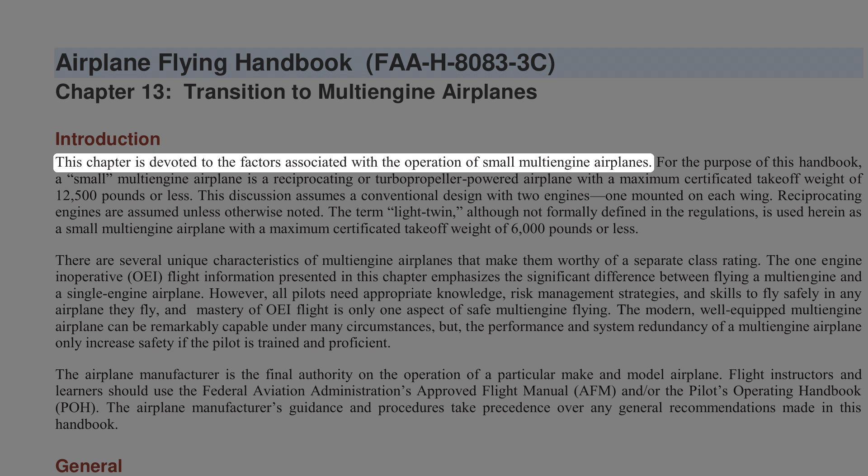Introduction. This chapter is devoted to the factors associated with the operation of small multi-engine airplanes. For the purpose of this handbook, a small multi-engine airplane is a reciprocating or turbopropeller-powered airplane with a maximum certificated takeoff weight of 12,500 pounds or less. This discussion assumes a conventional design with two engines, one mounted on each wing. Reciprocating engines are assumed unless otherwise noted. The term light twin, although not formally defined in the regulations, is used herein as a small multi-engine airplane with a maximum certificated takeoff weight of 6,000 pounds or less.

There are several unique characteristics of multi-engine airplanes that make them worthy of a separate class rating. The one-engine inoperative (OEI) flight information presented in this chapter emphasizes the significant difference between flying a multi-engine and a single-engine airplane. However, all pilots need appropriate knowledge, risk management strategies, and skills to fly safely in any airplane they fly, and mastery of OEI flight is only one aspect of safe multi-engine flying. The modern, well-equipped multi-engine airplane can be remarkably capable under many circumstances, but the performance and system redundancy of a multi-engine airplane only increase safety if the pilot is trained and proficient.

The airplane manufacturer is the final authority on the operation of a particular make and model airplane. Flight instructors and learners should use the Federal Aviation Administration's Approved Flight Manual (AFM) and/or the Pilot's Operating Handbook (POH). The airplane manufacturer's guidance and procedures take precedence over any general recommendations made in this handbook.

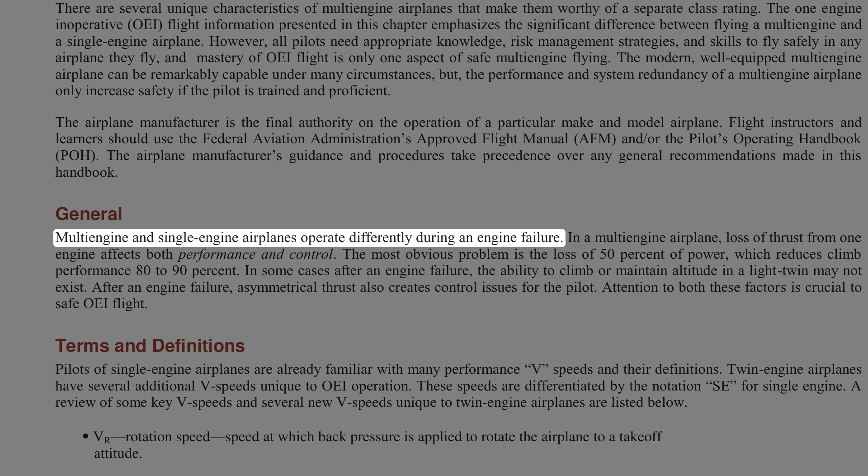General: multi-engine and single-engine airplanes operate differently during an engine failure. In a multi-engine airplane, loss of thrust from one engine affects both performance and control. The most obvious problem is the loss of 50% of power, which reduces climb performance 80 to 90%. In some cases after an engine failure, the ability to climb or maintain altitude in a light twin may not exist. After an engine failure, asymmetrical thrust also creates control issues for the pilot. Attention to both these factors is crucial to safe OEI flight.

Terms and definitions. Pilots of single-engine airplanes are already familiar with many performance V-speeds and their definitions. Twin-engine airplanes have several additional V-speeds unique to OEI operation. These speeds are differentiated by the notation SE, for single-engine. A review of some key V-speeds and several new V-speeds unique to twin-engine airplanes are listed below.

VR, rotation speed: speed at which back pressure is applied to rotate the airplane to a takeoff attitude. VLOF, liftoff speed: speed at which the airplane leaves the surface. Note: some manufacturers reference takeoff performance data to VR, others to VLOF.

VX, best angle of climb speed: speed at which the airplane gains the greatest altitude for a given distance of forward travel. VXSE, best angle of climb speed with OEI. VY, best rate of climb speed: speed at which the airplane gains the most altitude for a given unit of time. VYSE, best rate of climb speed with OEI.

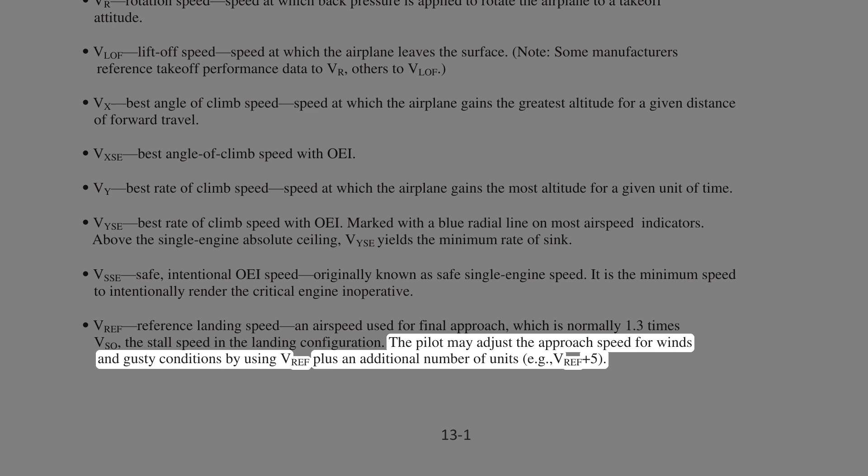VREF, reference landing speed: an airspeed used for final approach, which is normally 1.3 times VSO, the stall speed in the landing configuration. The pilot may adjust the approach speed for winds and gusty conditions by using VREF plus an additional number of units, e.g., VREF plus 5.

VMC, currently defined in 14 CFR Part 23, Section 23.2135(c), as the calibrated airspeed at which, following the sudden critical loss of thrust, it is possible to maintain control of the airplane. VMC is typically marked with a red radial line on most airspeed indicators.

VMC was previously defined in 14 CFR Part 23, Section 23.149 as the calibrated airspeed at which, when the critical engine is suddenly made inoperative, it is possible to maintain control of the airplane with that engine still inoperative, and thereafter maintain straight flight at the same speed with an angle of bank of not more than 5 degrees. This definition still applies to airplanes certified under that regulation. There is no requirement under either determination that the airplane be capable of climbing at this airspeed.

VMC only addresses directional control. Further discussion of VMC as determined during airplane certification and demonstrated in pilot training follows later in this chapter.

Unless otherwise noted, when V speeds are given in the AFM/POH, they apply to sea level, standard day conditions at maximum takeoff weight. Performance speeds vary with aircraft weight, configuration, and atmospheric conditions. The speeds may be stated in statute miles per hour (mph) or knots (kt), and may be given as calibrated airspeeds (CAS) or indicated airspeeds (IAS). As a general rule, newer AFM/POHs show V speeds in knots indicated airspeed (KIAS). Some V speeds are also stated in knots calibrated airspeed (KCAS) to meet certain regulatory requirements. Whenever available, pilots should operate the airplane from published indicated airspeeds.

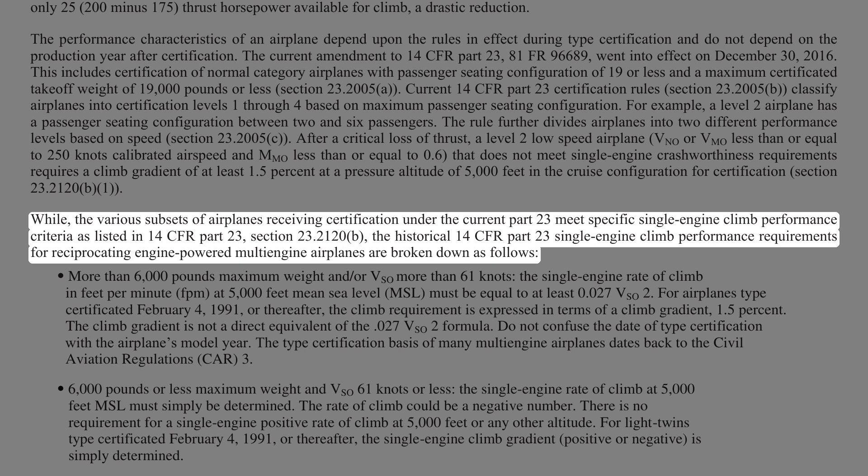While various subsets of airplanes receiving certification under current Part 23 meet specific single-engine climb performance criteria as listed in 14 CFR Part 23, Section 23.2120(B), the historical 14 CFR Part 23 single-engine climb performance requirements for reciprocating engine-powered multi-engine airplanes are broken down as follows.

More than 6,000 pounds maximum weight and/or VSO more than 61 knots: the single-engine rate of climb in feet per minute (FPM) at 5,000 feet MSL must be equal to at least 0.027 times VSO squared.

For airplanes type certificated February 4, 1991, or thereafter, the climb requirement is expressed in terms of climb gradient, 1.5%. The climb gradient is not a direct equivalent of the 0.027 VSO squared formula. Do not confuse the date of type certification with the airplane's model year. The type certification basis of many multi-engine airplanes dates back to Civil Aviation Regulations (CAR) 3.

6,000 pounds or less maximum weight and VSO 61 knots or less: the single-engine rate of climb at 5,000 feet MSL must simply be determined. The rate of climb could be a negative number. There is no requirement for a single-engine positive rate of climb at 5,000 feet or any other altitude. For light twins type certificated February 4, 1991, or thereafter, the single-engine climb gradient, positive or negative, is simply determined.

Operation of systems. This section deals with systems and equipment that are generally installed in multi-engine airplanes. Multi-engine airplanes share many features with complex single-engine airplanes. However, there are certain features that are found more often in airplanes with two or more engines.

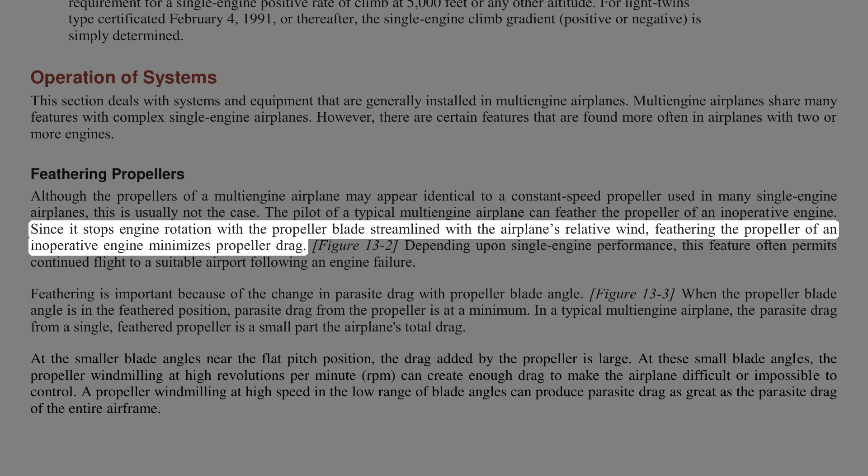Feathering propellers. Although the propellers of a multi-engine airplane may appear identical to a constant-speed propeller used in many single-engine airplanes, this is usually not the case. The pilot of a typical multi-engine airplane can feather the propeller of an inoperative engine. Since it stops engine rotation with the propeller blade streamlined with the airplane's relative wind, feathering the propeller of an inoperative engine minimizes propeller drag. Depending upon single-engine performance, this feature often permits continued flight to a suitable airport following an engine failure.

Feathering is important because of the change in parasite drag with propeller blade angle. When the propeller blade angle is in the feathered position, parasite drag from the propeller is at a minimum. In a typical multi-engine airplane, the parasite drag from a single, feathered propeller is a small part of the airplane's total drag.

At the smaller blade angles near the flat pitch position, the drag added by the propeller is large. At these small blade angles, the propeller windmilling at high RPM can create enough drag to make the airplane difficult or impossible to control. A propeller windmilling at high speed in the low range of blade angles can produce parasite drag as great as the parasite drag of the entire airframe.

Figure 13-2, feathered propeller. As a review, the constant speed propellers on almost all single-engine airplanes are of the non-feathering, oil pressure to increase pitch design. In this design, increased oil pressure from the propeller governor drives the blade angle towards high pitch, low RPM.

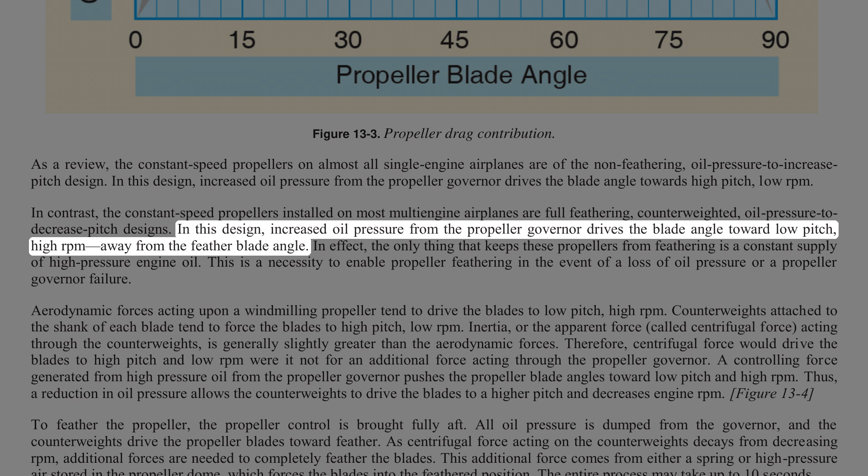In contrast, the constant speed propellers installed on most multi-engine airplanes are full feathering, counterweighted, oil pressure to decrease pitch designs. In this design, increased oil pressure from the propeller governor drives the blade angle toward low pitch, high RPM, away from the feather blade angle.

In effect, the only thing that keeps these propellers from feathering is a constant supply of high-pressure engine oil. This is a necessity to enable propeller feathering in the event of a loss of oil pressure or a propeller governor failure. Aerodynamic forces acting upon a windmilling propeller tend to drive the blades to low pitch, high RPM.

Counterweights attached to the shank of each blade tend to force the blades to high pitch, low RPM. Inertia, or the apparent force called centrifugal force, acting through the counterweights, is generally slightly greater than the aerodynamic forces. Therefore, centrifugal force would drive the blades to high pitch and low RPM were it not for an additional force acting through the propeller governor.

A controlling force generated from high-pressure oil from the propeller governor pushes the propeller blade angles toward low pitch and high RPM. Thus, a reduction in oil pressure allows the counterweights to drive the blades to a higher pitch and decreases engine RPM. To feather the propeller, the control is brought fully aft. All oil pressure is dumped from the governor, and the counterweights drive the propeller blades toward feather.

As centrifugal force acting on the counterweights decays from decreasing RPM, additional forces are needed to completely feather the blades. This additional force comes from either a spring or high-pressure air stored in the propeller dome, which forces the blades into the feathered position. The entire process may take up to 10 seconds.

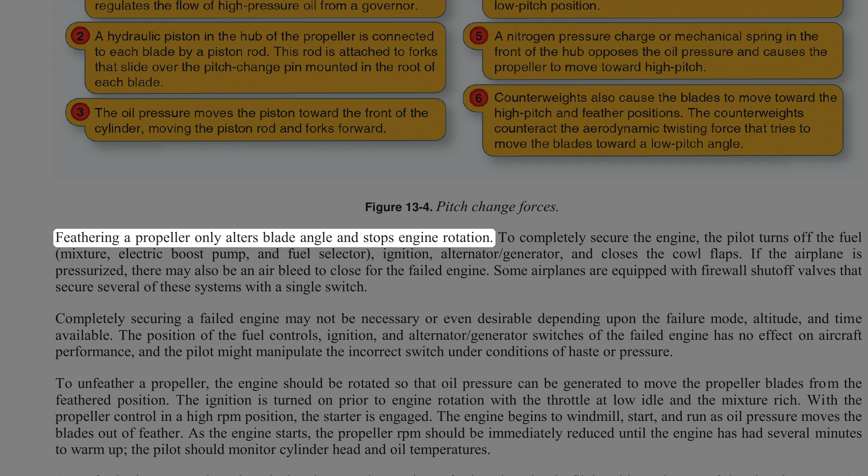Feathering a propeller only alters blade angle and stops engine rotation. To completely secure the engine, the pilot turns off the fuel, mixture, electric boost pump, and fuel selector, ignition, alternator, generator, and closes the cowl flaps.

If the airplane is pressurized, there may also be an air bleed to close for the failed engine. Some airplanes are equipped with firewall shutoff valves that secure several of these systems with a single switch.

Completely securing a failed engine may not be necessary or even desirable depending upon the failure mode, altitude, and time available. The position of the fuel controls, ignition, and alternator, generator switches of the failed engine has no effect on aircraft performance, and the pilot might manipulate the incorrect switch under conditions of haste or pressure.

To unfeather a propeller, the engine should be rotated so that oil pressure can be generated to move the propeller blades from the feathered position. The ignition is turned on prior to engine rotation with the throttle at low idle and the mixture rich. With the propeller control in a high RPM position, the starter is engaged.

The engine begins to windmill, start, and run as oil pressure moves the blades out of feather. As the engine starts, the propeller RPM should be immediately reduced until the engine has had several minutes to warm up. The pilot should monitor cylinder head and oil temperatures.

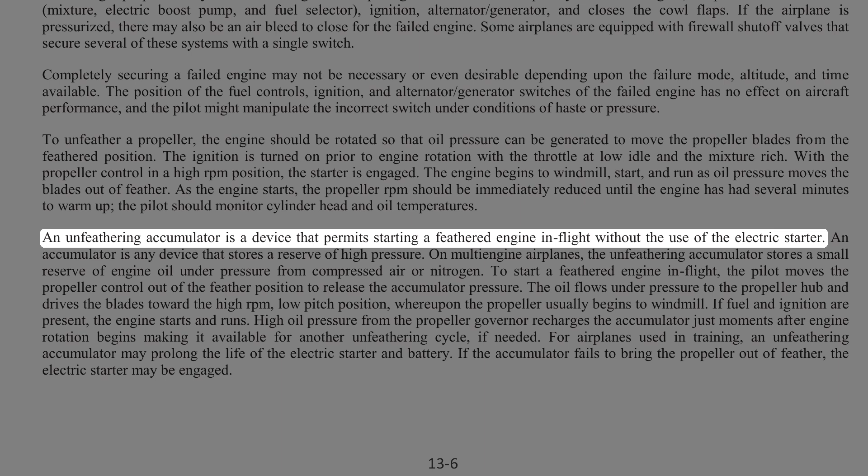An unfeathering accumulator is a device that permits starting a feathered engine in flight without the use of the electric starter. An accumulator is any device that stores a reserve of high pressure. On multi-engine airplanes, the unfeathering accumulator stores a small reserve of engine oil under pressure from compressed air or nitrogen.

To start a feathered engine in flight, the pilot moves the propeller control out of the feather position to release the accumulator pressure. The oil flows under pressure to the propeller hub and drives the blades toward the high RPM, low pitch position, whereupon the propeller usually begins to windmill. If fuel and ignition are present, the engine starts and runs.

High oil pressure from the propeller governor recharges the accumulator just moments after engine rotation begins, making it available for another unfeathering cycle, if needed. For airplanes used in training, an unfeathering accumulator may prolong the life of the electric starter and battery.

If the accumulator fails to bring the propeller out of feather, the electric starter may be engaged. In any event, the AFM/POH procedures should be followed for the exact unfeathering procedure. Both feathering and starting a feathered reciprocating engine on the ground are strongly discouraged by manufacturers due to the excessive stress and vibrations generated.

As just described, a loss of oil pressure from the propeller governor allows the counterweights, spring, and/or dome charge to drive the blades to feather. Logically then, the propeller blades should feather every time an engine is shut down as oil pressure falls to zero.

However, below approximately 800 revolutions per minute, a reduction in centrifugal force allows small anti-feathering lock pins in the pitch-changing mechanism of the propeller hub to move into place and block feathering. Therefore, if a propeller is to be feathered, it needs to be done before engine RPM decays below approximately 800.

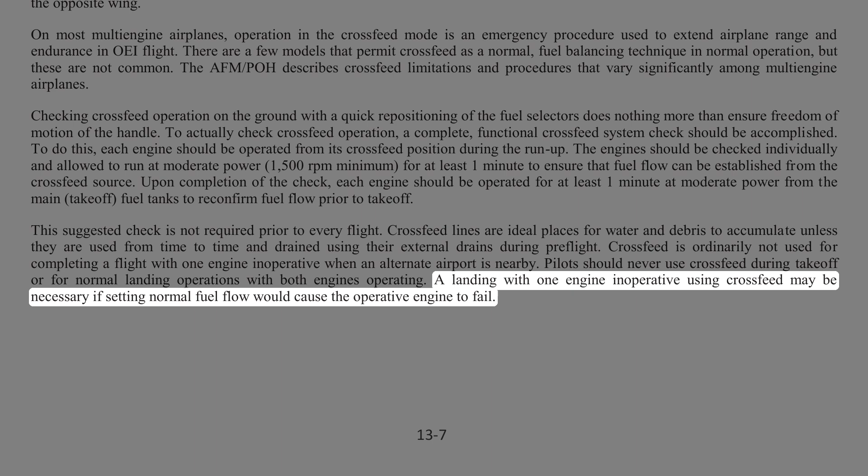Combustion heater. Combustion heaters are another common item on multi-engine airplanes not found on single-engine airplanes.

A combustion heater is best described as a small furnace that burns gasoline to produce heated air for occupant comfort and windshield defogging. Most are thermostatically operated and have a separate hour meter to record time in service for maintenance purposes. Automatic over-temperature protection is provided by a thermal switch mounted on the unit that cannot be accessed in flight. This requires the pilot or mechanic to visually inspect the unit for possible heat damage in order to reset the switch.

Manufacturers often suggest a cool-down period when shutting down a combustion heater. Most heater instructions recommend that outside air be permitted to circulate through the unit for at least 15 seconds in flight, or that the ventilation fan can be operated for at least 2 minutes on the ground. Failure to provide an adequate cool-down usually trips the thermal switch and renders the heater inoperative until the switch is reset.

Flight Director, Autopilot. Multi-engine airplanes are often equipped with Flight Director, Autopilot, FD/AP systems. The system integrates pitch, roll, heading, altitude, and radio navigation signals in a computer. The outputs, called computed commands, are displayed on a Flight Command Indicator, FCI. The FCI replaces the conventional attitude indicator on the instrument panel. The FCI is occasionally referred to as a Flight Director Indicator, FDI, or as an Attitude Director Indicator, ADI.

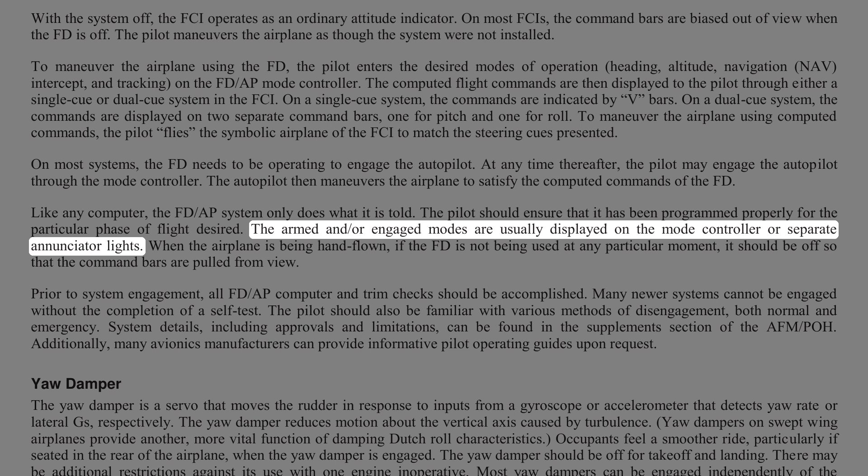The armed and/or engaged modes are usually displayed on the mode controller or separate annunciator lights. When the airplane is being hand-flown, if the FD is not being used at any particular moment, it should be off so that the command bars are pulled from view.

Prior to system engagement, all FD/AP computer and trim checks should be accomplished. Many newer systems cannot be engaged without the completion of a self-test. The pilot should also be familiar with various methods of disengagement, both normal and emergency. System details, including approvals and limitations, can be found in the supplements section of the AFM/POH. Additionally, many avionics manufacturers can provide informative pilot operating guides upon request.

Yaw Damper. The yaw damper is a servo that moves the rudder in response to inputs from a gyroscope or accelerometer that detects yaw rate or lateral Gs, respectively. The yaw damper reduces motion about the vertical axis caused by turbulence. Yaw dampers on swept-wing airplanes provide another, more vital function of damping Dutch roll characteristics. Occupants feel a smoother ride, particularly if seated in the rear of the airplane, when the yaw damper is engaged.

The yaw damper should be off for takeoff and landing. There may be additional restrictions against its use with one engine inoperative. Most yaw dampers can be engaged independently of the autopilot.

Alternator or generator: On a multi-engine aircraft, each engine has an alternator or generator installed. Alternator or generator paralleling circuitry matches the output of each engine's alternator or generator so that the electrical system load is shared equally between them. In the event of an alternator or generator failure, the inoperative unit can be isolated and the entire electrical system powered from the remaining one. Depending upon the electrical capacity of the alternator or generator, the pilot may need to reduce the electrical load, referred to as load shedding, when operating on a single unit. The AFM/POH contains system description and limitations.

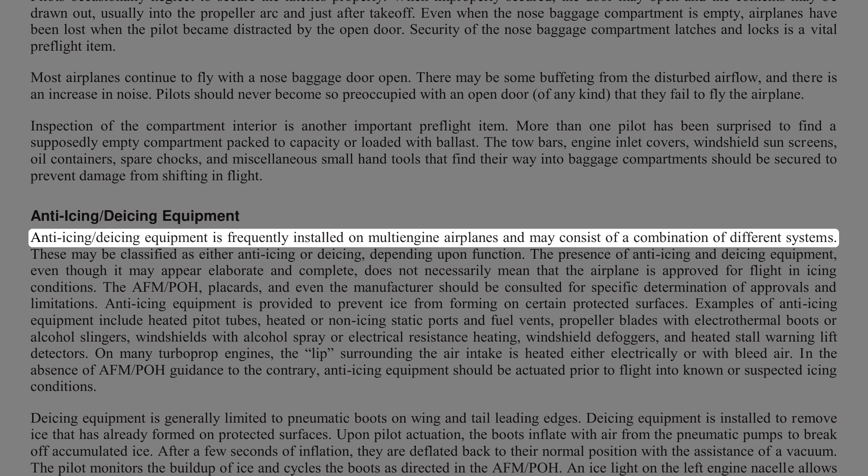Anti-icing, de-icing equipment is frequently installed on multi-engine airplanes and may consist of a combination of different systems. These may be classified as either anti-icing or deicing, depending upon function. The presence of anti-icing and deicing equipment, even though it may appear elaborate and complete, does not necessarily mean that the airplane is approved for flight in icing conditions. The AFM/POH, placards, and even the manufacturer should be consulted for specific determination of approvals and limitations.

Anti-icing equipment is provided to prevent ice from forming on certain protected surfaces. Examples include heated pitot tubes, heated or non-icing static ports and fuel vents, propeller blades with electrothermal boots or alcohol slingers, windshields with alcohol spray or electrical resistance heating, windshield defoggers, and heated stall warning lift detectors. On many turboprop engines, the lip surrounding the air intake is heated either electrically or with bleed air.

In the absence of AFM/POH guidance to the contrary, anti-icing equipment should be actuated prior to flight into known or suspected icing conditions. De-icing equipment is generally limited to pneumatic boots on wing and tail leading edges. De-icing equipment is installed to remove ice that has already formed on protected surfaces.

Upon pilot actuation, the boots inflate with air from the pneumatic pumps to break off accumulated ice. After a few seconds of inflation, they are deflated back to their normal position with the assistance of a vacuum. The pilot monitors the buildup of ice and cycles the boots as directed in the AFM/POH. An ice light on the left engine nacelle allows the pilot to monitor wing ice accumulation at night.

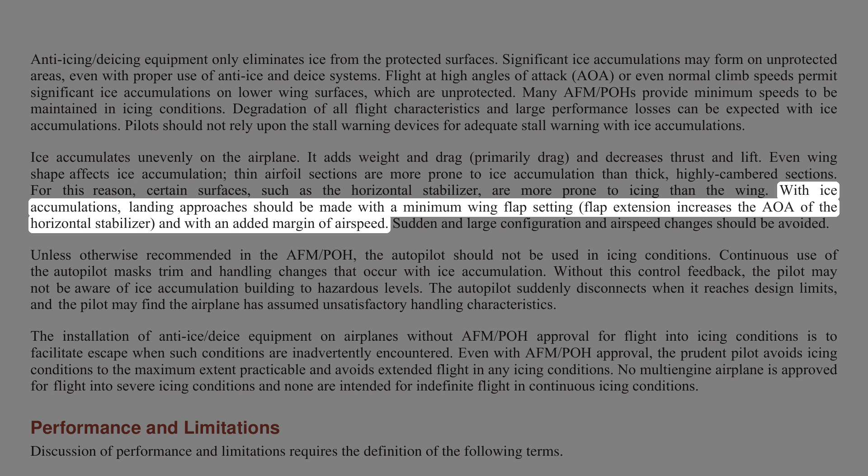For this reason, certain surfaces, such as the horizontal stabilizer, are more prone to icing than the wing. With ice accumulations, landing approaches should be made with a minimum wing flap setting. Flap extension increases the angle of attack of the horizontal stabilizer, so use an added margin of airspeed. Sudden and large configuration and airspeed changes should be avoided.

Unless otherwise recommended in the AFM POH, the autopilot should not be used in icing conditions. Continuous use of the autopilot masks trim and handling changes that occur with ice accumulation. Without this control feedback, the pilot may not be aware of ice accumulation building to hazardous levels. The autopilot suddenly disconnects when it reaches design limits, and the pilot may find the airplane has assumed unsatisfactory handling characteristics.

The installation of anti-ice and de-ice equipment on airplanes without AFM POH approval for flight into icing conditions is to facilitate escape when such conditions are inadvertently encountered. Even with AFM POH approval, the prudent pilot avoids icing conditions to the maximum extent practicable and avoids extended flight in any icing conditions. No multi-engine airplane is approved for flight into severe icing conditions, and none are intended for indefinite flight in continuous icing conditions.

Performance and limitations. Discussion of performance and limitations requires the definition of the following terms. Accelerate stop distance is the runway length required to accelerate to a specified speed, either VR or VLOF as specified by the manufacturer, experience an engine failure, and bring the airplane to a complete stop. Accelerate go distance is the horizontal distance required to continue the takeoff and climb to 50 feet, assuming an engine failure at VR or VLOF as specified by the manufacturer.

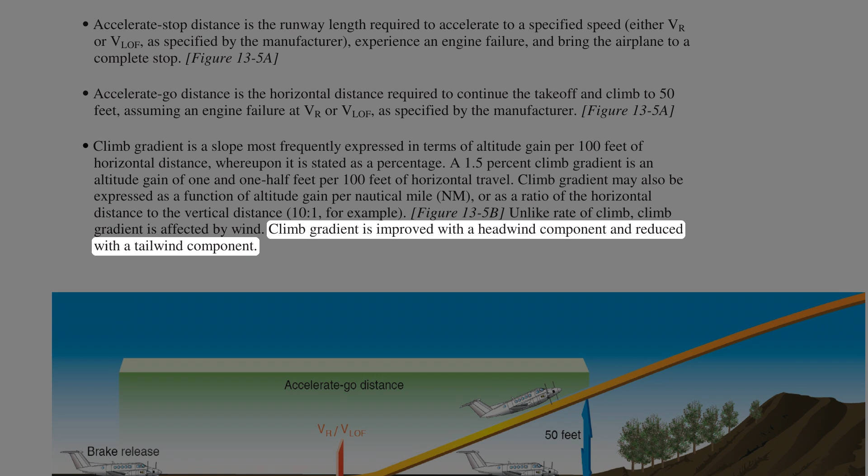Unlike rate of climb, climb gradient is affected by wind. Climb gradient is improved with a headwind component and reduced with a tailwind component.

The all-engine service ceiling of multi-engine airplanes is the highest altitude at which the airplane can maintain a steady rate of climb of 100 fpm with both engines operating. The airplane has reached its absolute ceiling when climb is no longer possible. The single-engine service ceiling is reached when the multi-engine airplane can no longer maintain a 50 fpm rate of climb with one engine inoperative, and its single-engine absolute ceiling when climb is no longer possible.

The takeoff in a multi-engine airplane should be planned in sufficient detail so that the appropriate action is taken in the event of an engine failure. The pilot should be thoroughly familiar with the airplane's performance capabilities and limitations in order to make an informed takeoff decision as part of the pre-flight planning. That decision should be reviewed as the last item of the before takeoff checklist.

In the event of an engine failure shortly after takeoff, the decision is basically one of continuing flight or landing, even off airport. If single-engine climb performance is adequate for continued flight, and the airplane has been promptly and correctly configured, the climb after takeoff may be continued. If single-engine climb performance is such that climb is unlikely or impossible, a landing has to be made in the most suitable area. To be avoided above all is attempting to continue flight when it is not within the airplane's performance capability to do so.

Takeoff planning factors include weight and balance, airplane performance, both single and multi-engine, runway length, slope and contamination, terrain and obstacles in the area, weather conditions, and pilot proficiency.

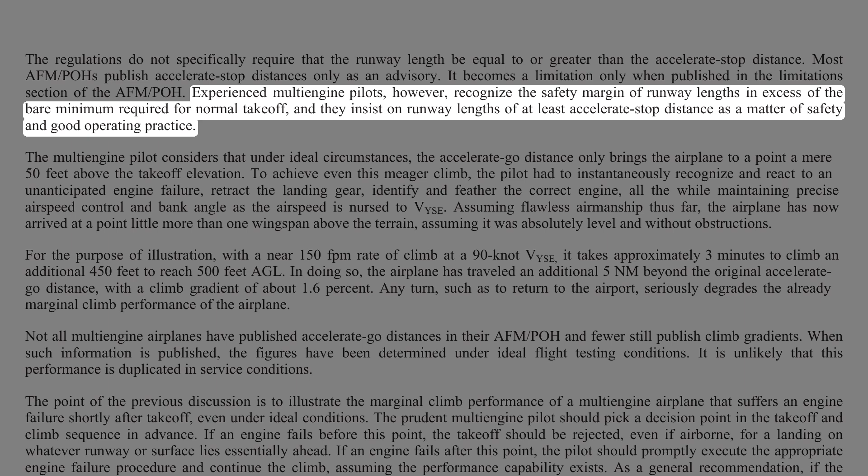The multi-engine pilot considers that under ideal circumstances, the accelerate-go distance only brings the airplane to a point a mere 50 feet above the takeoff elevation. To achieve even this meager climb, the pilot had to instantaneously recognize and react to an unanticipated engine failure, retract the landing gear, identify and feather the correct engine, all while maintaining precise airspeed control and bank angle as the airspeed is nursed to VYSE.

Assuming flawless airmanship thus far, the airplane has now arrived at a point little more than one wingspan above the terrain, assuming it was absolutely level and without obstructions. For illustration, with a near 150 fpm rate of climb at a 90 knot VYSE, it takes approximately 3 minutes to climb an additional 450 feet to reach 500 feet AGL. In doing so, the airplane has traveled an additional 5 nm beyond the original accelerate-go distance, with a climb gradient of about 1.6%. Any turn, such as to return to the airport, seriously degrades the already marginal climb performance of the airplane.

Not all multi-engine airplanes have published accelerate-go distances in their AFM or POH, and fewer still publish climb gradients. When such information is published, the figures have been determined under ideal flight testing conditions. It is unlikely that this performance is duplicated in service conditions. The point of this discussion is to illustrate the marginal climb performance of a multi-engine airplane that suffers an engine failure shortly after takeoff, even under ideal conditions.

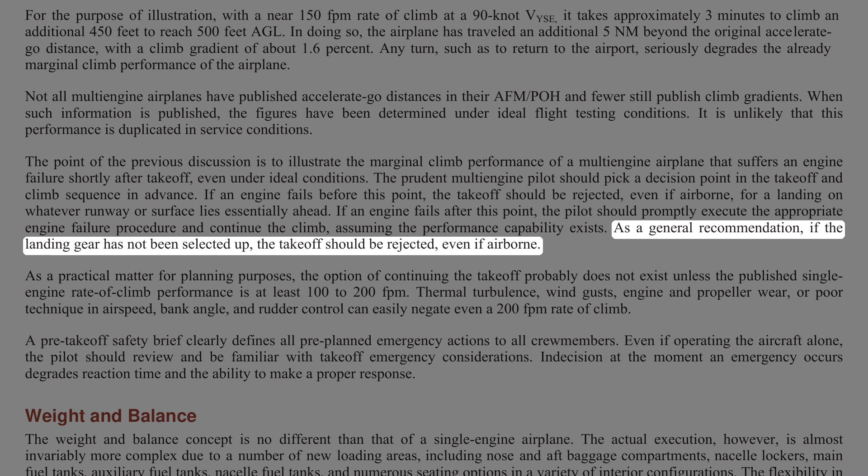As a general recommendation, if the landing gear has not been selected up, the takeoff should be rejected, even if airborne. As a practical matter for planning purposes, the option of continuing the takeoff probably does not exist unless the published single engine rate of climb performance is at least 100 to 200 fpm. Thermal turbulence, wind gusts, engine and propeller wear, or poor technique in airspeed, bank angle, and rudder control can easily negate even a 200 fpm rate of climb.

A pre-takeoff safety brief clearly defines all pre-planned emergency actions to all crew members. Even if operating the aircraft alone, the pilot should review and be familiar with takeoff emergency considerations. Indecision at the moment an emergency occurs degrades reaction time and the ability to make a proper response.

Weight and balance: the concept is no different than that of a single-engine airplane. The actual execution, however, is almost invariably more complex due to a number of new loading areas, including nose and aft baggage compartments, nacelle lockers, main fuel tanks, auxiliary fuel tanks, nacelle fuel tanks, and numerous seating options in a variety of interior configurations. The flexibility in loading offered by the multi-engine airplane places a responsibility on the pilot to address weight and balance prior to each flight.

The terms empty weight, licensed empty weight, standard empty weight, and basic empty weight, as they appear on the manufacturer's original weight and balance documents, are sometimes confused by pilots. In 1975, the General Aviation Manufacturers Association, GAMA, adopted a standardized format for AFM POHs. It was implemented by most manufacturers in model year 1976. Airplanes whose manufacturers conform to the GAMA standards utilize the following terminology for weight and balance.

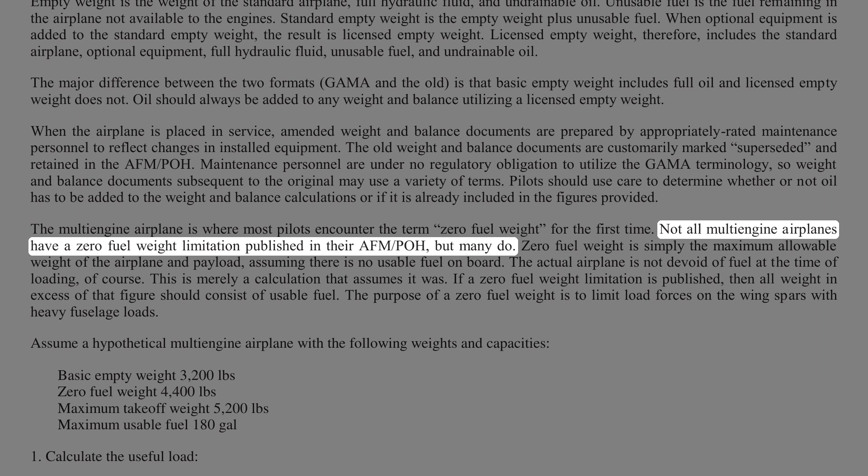The multi-engine airplane is where most pilots encounter the term zero fuel weight for the first time. Not all multi-engine airplanes have a zero fuel weight limitation published in their AFM, POH, but many do. Zero fuel weight is simply the maximum allowable weight of the airplane and payload, assuming there is no usable fuel on board. The actual airplane is not devoid of fuel at the time of loading, of course. This is merely a calculation that assumes it was.

If a zero fuel weight limitation is published, then all weight in excess of that figure should consist of usable fuel. The purpose of a zero fuel weight is to limit load forces on the wing spars with heavy fuselage loads. Assume a hypothetical multi-engine airplane with the following weights and capacities: basic empty weight 3,200 pounds, zero fuel weight 4,400 pounds, maximum takeoff weight 5,200 pounds, maximum usable fuel 180 gallons.

1. Calculate the useful load. Maximum takeoff weight 5,200 pounds, minus basic empty weight 3,200 pounds, equals useful load 2,000 pounds. The useful load is the maximum combination of usable fuel, passengers, baggage, and cargo that the airplane is capable of carrying.

2. Calculate the payload. Zero fuel weight 4,400 pounds, minus basic empty weight 3,200 pounds, equals payload 1,200 pounds. The payload is the maximum combination of passengers, baggage, and cargo that the airplane is capable of carrying. A zero fuel weight, if published, is the limiting weight.

3. Calculate the fuel capacity at maximum payload, 1,200 pounds. Maximum takeoff weight 5,200 pounds, minus zero fuel weight 4,400 pounds, equals fuel allowed 800 pounds. Assuming maximum payload, the only weight permitted in excess of the zero fuel weight should consist of usable fuel. In this case, 133.3 gallons.

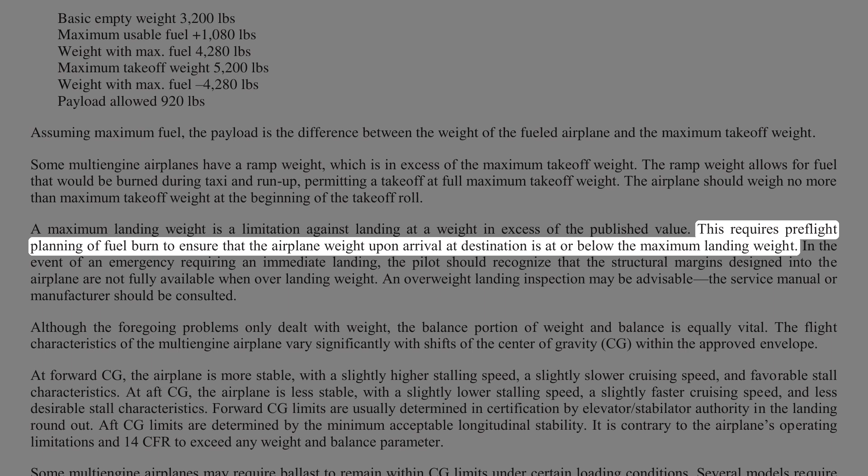A maximum landing weight is a limitation against landing at a weight in excess of the published value. This requires pre-flight planning of fuel burn to ensure that the airplane weight upon arrival at destination is at or below the maximum landing weight. In the event of an emergency requiring an immediate landing, the pilot should recognize that the structural margins designed into the airplane are not fully available when over landing weight.

An overweight landing inspection may be advisable. The service manual or manufacturer should be consulted.

Although the foregoing problems only dealt with weight, the balance portion of weight and balance is equally vital. The flight characteristics of the multi-engine airplane vary significantly with shifts of the center of gravity, CG, within the approved envelope. At forward CG, the airplane is more stable, with a slightly higher stalling speed, a slightly slower cruising speed, and favorable stall characteristics. At aft CG, the airplane is less stable, with a slightly lower stalling speed, a slightly faster cruising speed, and less desirable stall characteristics.

Forward CG limits are usually determined in certification by elevator or stabilator authority in the landing round out. Aft CG limits are determined by the minimum acceptable longitudinal stability. It is contrary to the airplane's operating limitations and 14 CFR to exceed any weight and balance parameter.

Some multi-engine airplanes may require ballast to remain within CG limits under certain loading conditions. Several models require ballast in the aft baggage compartment with only a learner and instructor on board to avoid exceeding the forward CG limit. When passengers are seated in the aftmost seats of some models, ballast or baggage may be required in the nose baggage compartment to avoid exceeding the aft CG limit.

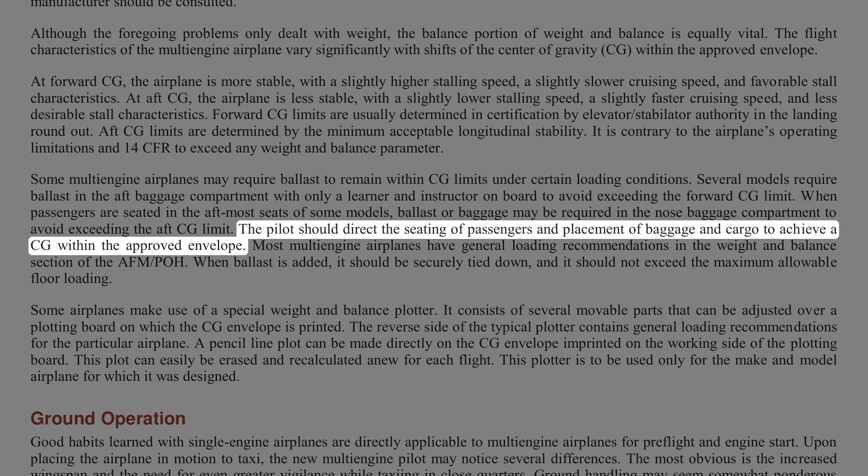The pilot should direct the seating of passengers and placement of baggage and cargo to achieve a CG within the approved envelope. Most multi-engine airplanes have general loading recommendations in the weight and balance section of the AFM/POH. When ballast is added, it should be securely tied down, and should not exceed the maximum allowable floor loading.

Some airplanes make use of a special weight and balance plotter. It consists of several movable parts that can be adjusted over a plotting board on which the CG envelope is printed. The reverse side of the typical plotter contains general loading recommendations for the particular airplane. A pencil line plot can be made directly on the CG envelope imprinted on the working side of the plotting board. This plot can easily be erased and recalculated anew for each flight. This plotter is to be used only for the make and model airplane for which it was designed.

Ground operation: good habits learned with single-engine airplanes are directly applicable to multi-engine airplanes for pre-flight and engine start. Upon placing the airplane in motion to taxi, the new multi-engine pilot may notice several differences. The most obvious is the increased wingspan and the need for even greater vigilance while taxiing in close quarters. Ground handling may seem somewhat ponderous, and the multi-engine airplane is not as nimble as the typical 2- or 4-place single-engine airplane. As always, the pilot should use care not to ride the brakes by keeping engine power to a minimum.

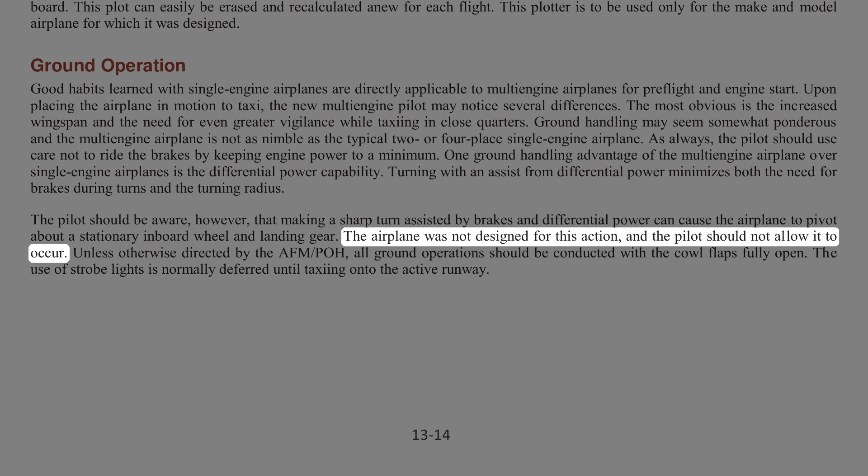One ground handling advantage of the multi-engine airplane over single-engine airplanes is the differential power capability. Turning with an assist from differential power minimizes both the need for brakes during turns and the turning radius. The pilot should be aware, however, that making a sharp turn assisted by brakes and differential power can cause the airplane to pivot about a stationary inboard wheel and landing gear. The airplane was not designed for this action, and the pilot should not allow it to occur.

Unless otherwise directed by the AFM/POH, all ground operations should be conducted with the cowl flaps fully open. The use of strobe lights is normally deferred until taxiing onto the active runway.

Normal and crosswind takeoff and climb. After completing the before takeoff checklist and pre-takeoff safety brief, and after receiving an air traffic control clearance if applicable, the pilot should check for approaching aircraft and line up on the runway centerline. If departing from an airport without an operating control tower, the pilot should listen on the appropriate frequency, make a careful check for traffic, and transmit a radio advisory before entering the runway.

Sharp turns onto the runway combined with a rolling takeoff are not a good operating practice and may be prohibited by the AFM/POH due to the possibility of unporting a fuel tank pickup. The takeoff itself may be prohibited by the AFM/POH under any circumstances below certain fuel levels.

The flight controls should be positioned for a crosswind, if present. Exterior lights, such as landing and taxi lights and wingtip strobes, should be illuminated immediately prior to initiating the takeoff roll, day or night. If holding in takeoff position for any length of time, particularly at night, the pilot should activate all exterior lights upon taxiing into position.

Takeoff power should be set as recommended in the AFM/POH. With normally aspirated, non-turbocharged engines, this is full throttle. Full throttle is also used in most turbocharged engines. There are some turbocharged engines, however, that require the pilot to set a specific power setting, usually just below red line manifold pressure. This yields takeoff power with less than full throttle travel. Turbocharged engines often require special consideration.

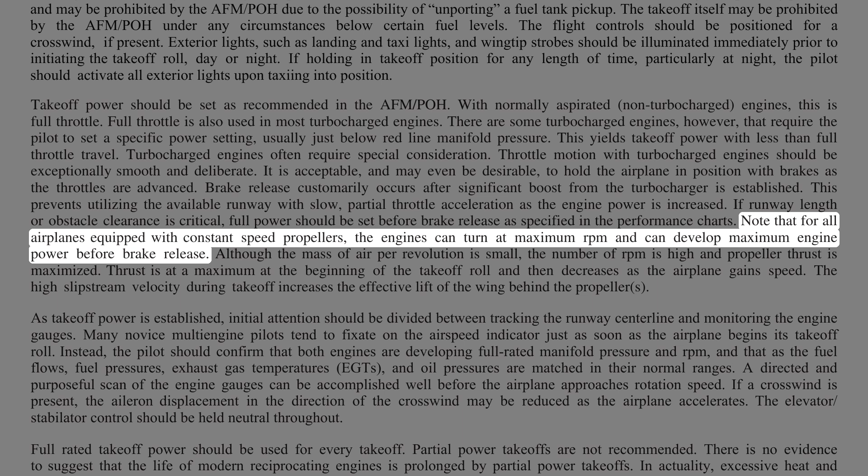If runway length or obstacle clearance is critical, full power should be set before brake release as specified in the performance charts. Note that for all airplanes equipped with constant speed propellers, the engines can turn at maximum RPM and can develop maximum engine power before brake release.

Although the mass of air per revolution is small, the number of RPM is high and propeller thrust is maximized. Thrust is at a maximum at the beginning of the takeoff roll and then decreases as the airplane gains speed. The high slipstream velocity during takeoff increases the effective lift of the wing behind the propellers. As takeoff power is established, initial attention should be divided between tracking the runway centerline and monitoring the engine gauges.

Many novice multi-engine pilots tend to fixate on the airspeed indicator as soon as the airplane begins its takeoff roll. Instead, the pilot should confirm that both engines are developing full rated manifold pressure and RPM, and that fuel flows, fuel pressures, exhaust gas temperatures, and oil pressures are matched in their normal ranges. A directed and purposeful scan of the engine gauges can be accomplished well before the airplane approaches rotation speed.

If a crosswind is present, the aileron displacement in the direction of the crosswind may be reduced as the airplane accelerates. The elevator or stabilator control should be held neutral throughout.

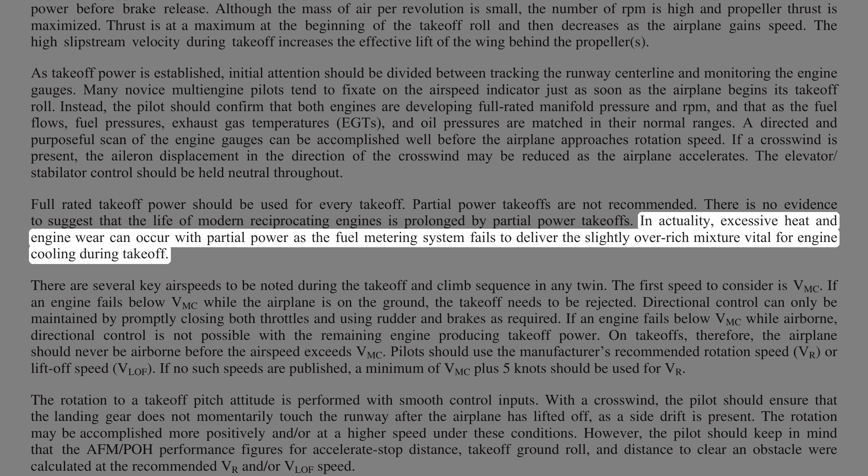Full rated takeoff power should be used for every takeoff. Partial power takeoffs are not recommended. There is no evidence to suggest that the life of modern reciprocating engines is prolonged by partial power takeoffs. In actuality, excessive heat and engine wear can occur with partial power, as the fuel metering system fails to deliver the slightly over-rich mixture vital for engine cooling during takeoff.

There are several key airspeeds to be noted during the takeoff and climb sequence in any twin. The first speed to consider is VMC. If an engine fails below VMC while the airplane is on the ground, the takeoff needs to be rejected. Directional control can only be maintained by promptly closing both throttles and using rudder and brakes as required. If an engine fails below VMC while airborne, directional control is not possible with the remaining engine producing takeoff power. On takeoffs, therefore, the airplane should never be airborne before the airspeed exceeds VMC.

Pilots should use the manufacturer's recommended rotation speed, VR, or liftoff speed, VLOF. If no such speeds are published, a minimum of VMC plus 5 knots should be used for VR. The rotation to a takeoff pitch attitude is performed with smooth control inputs.

With a crosswind, the pilot should ensure that the landing gear does not momentarily touch the runway after the airplane has lifted off, as a side drift is present. The rotation may be accomplished more positively and/or at a higher speed under these conditions. However, the pilot should keep in mind that the AFM/POH performance figures for accelerate-stop distance, takeoff ground roll, and distance to clear an obstacle were calculated at the recommended VR and/or VLOF speed.

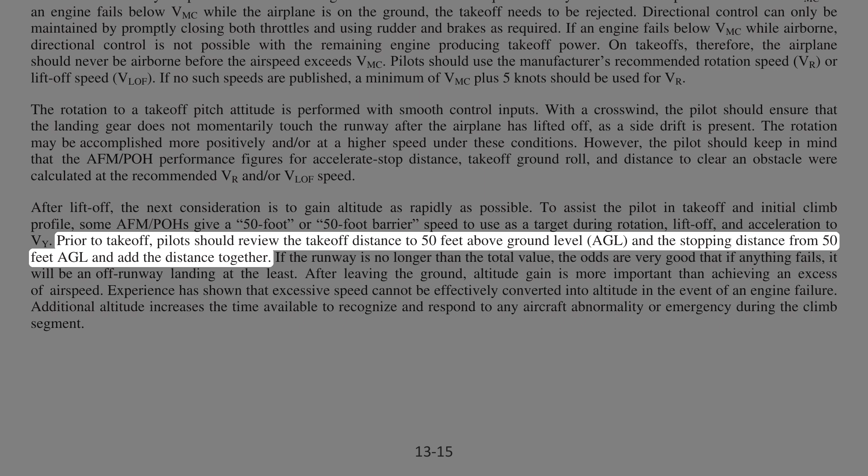After liftoff, the next consideration is to gain altitude as rapidly as possible. To assist the pilot in the takeoff and initial climb profile, some AFM/POHs give a 50-foot barrier speed to use as a target during rotation, liftoff, and acceleration to VY. Prior to takeoff, pilots should review the takeoff distance to 50 feet AGL and the stopping distance from 50 feet AGL, and add the distances together. If the runway is no longer than that total value, the odds are very good that if anything fails, it will be an off-runway landing at the least.

After leaving the ground, altitude gain is more important than achieving an excess of airspeed. Experience has shown that excessive speed cannot be effectively converted into altitude in the event of an engine failure. Additional altitude increases the time available to recognize and respond to any aircraft abnormality or emergency during the climb segment.

Excessive climb attitudes can be just as dangerous as excessive airspeed. Steep climb attitudes limit forward visibility and impede the pilot's ability to detect and avoid other traffic. The airplane should be allowed to accelerate in a shallow climb to attain VY, the best all-engine rate of climb speed. VY should then be maintained until achieving a safe single-engine maneuvering altitude, which considers terrain and obstructions. Any speed above or below VY reduces the performance of the airplane.

Even with all engines operating normally, terrain and obstruction clearance during the initial climb after takeoff is an important pre-flight consideration. Most airliners and most turbine-powered airplanes climb out at an attitude that yields best rate of climb, VY, usually utilizing a flight management system, FMS.

When to raise the landing gear after takeoff depends on several factors. Normally, the gear should be retracted when there is insufficient runway available for landing and after a positive rate of climb is established, as indicated on the altimeter. If an excessive amount of runway is available, it would not be prudent to leave the landing gear down for an extended period of time and sacrifice climb performance and acceleration.

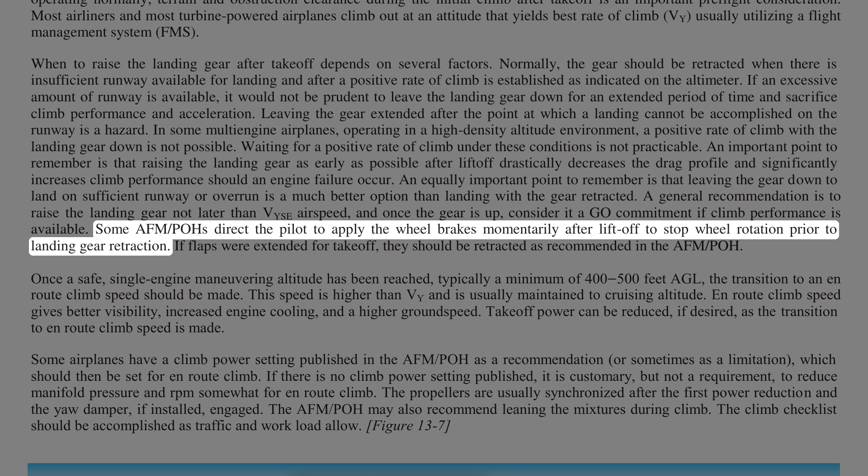A general recommendation is to raise the landing gear not later than VYSE airspeed, and once the gear is up, consider it a go commitment if climb performance is available. Some AFM/POHs direct the pilot to apply the wheel brakes momentarily after liftoff to stop wheel rotation prior to landing gear retraction.

If flaps were extended for takeoff, they should be retracted as recommended in the AFM/POH. Once a safe, single-engine maneuvering altitude has been reached, typically a minimum of 400 to 500 feet AGL, the transition to an en route climb speed should be made. This speed is higher than VY and is usually maintained to cruising altitude.

En route climb speed gives better visibility, increased engine cooling, and a higher ground speed. Takeoff power can be reduced, if desired, as the transition to en route climb speed is made. Some airplanes have a climb power setting published in the AFM/POH as a recommendation, or sometimes as a limitation, which should then be set for en route climb.

If there is no climb power setting published, it is customary, but not a requirement, to reduce manifold pressure and RPM somewhat for en route climb. The propellers are usually synchronized after the first power reduction, and the yaw damper, if installed, engaged. The AFM/POH may also recommend leaning the mixtures during climb. The climb checklist should be accomplished as traffic and workload allow.

Short field takeoff and climb. The short field takeoff and climb differs from the normal takeoff and climb in the airspeeds and initial climb profile. Some AFM/POHs give separate short field takeoff procedures and performance charts that recommend specific flap settings and airspeeds.

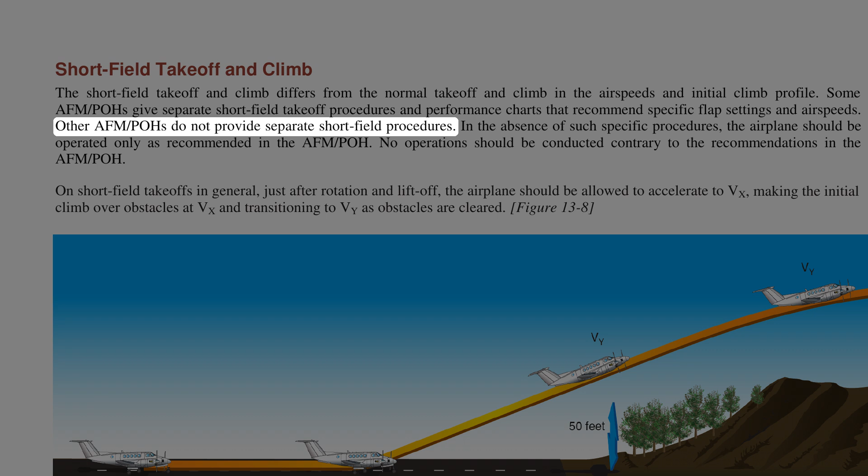Other AFM/POHs do not provide separate short field procedures. In the absence of such specific procedures, the airplane should be operated only as recommended in the AFM/POH. No operations should be conducted contrary to the recommendations in the AFM/POH. On short field takeoffs in general, just after rotation and liftoff, the airplane should be allowed to accelerate to VX, making the initial climb over obstacles at VX and transitioning to VY as obstacles are cleared.

When partial flaps are recommended for short field takeoffs, many light twins have a strong tendency to become airborne prior to VMC plus 5 knots. Attempting to prevent premature liftoff with forward elevator pressure results in wheel barrowing. To prevent this, allow the airplane to become airborne, but only a few inches above the runway.

The pilot should be prepared to promptly abort the takeoff and land in the event of engine failure on takeoff with landing gear and flaps extended at airspeeds below VX. Engine failure on takeoff, particularly with obstructions, is compounded by the low airspeeds and steep climb attitudes utilized in short field takeoffs. VX and VXSE are often perilously close to VMC, leaving scant margin for error in the event of engine failure as VXSE is assumed.

If flaps were used for takeoff, the engine failure situation becomes even more critical due to the additional drag incurred. If VX is less than 5 knots higher than VMC, give strong consideration to reducing useful load or using another runway in order to increase the takeoff margins so that a short field technique is not required.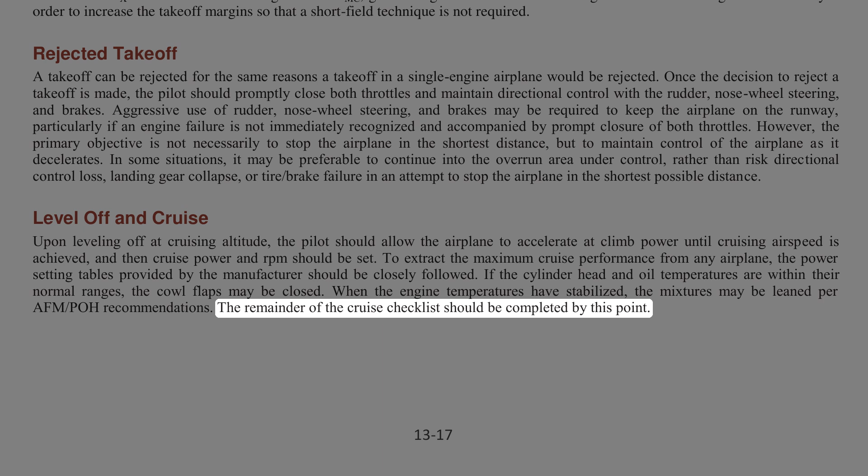Fuel management in multi-engine airplanes is often more complex than in single-engine airplanes. Depending upon system design, the pilot may need to select between main tanks and auxiliary tanks, or even employ fuel transfer from one tank to another. In complex fuel systems, limitations are often found restricting the use of some tanks to level flight only, or requiring a reserve of fuel in the main tanks for descent and landing.

Electric fuel pump operation can also vary widely among different models, particularly during tank switching or fuel transfer. Some fuel pumps are to be on for takeoff and landing, others are to be off. There is simply no substitute for thorough systems and AFM/POH knowledge when operating complex aircraft.

Slow flight. There is nothing unusual about maneuvering during slow flight in a multi-engine airplane. Slow flight may be conducted in straight and level flight, turns, climbs, or descents. It can also be conducted in the clean configuration, landing configuration, or at any other combination of landing gear and flaps. Slow flight in a multi-engine airplane should be conducted so the maneuver can be completed no lower than 3,000 feet AGL, or higher if recommended by the manufacturer.

In all cases, practicing slow flight should be conducted at an adequate height above the ground for recovery should the airplane inadvertently stall. Pilots should closely monitor cylinder head and oil temperatures during slow flight. Some high-performance multi-engine airplanes tend to heat up fairly quickly under some conditions of slow flight, particularly in the landing configuration.

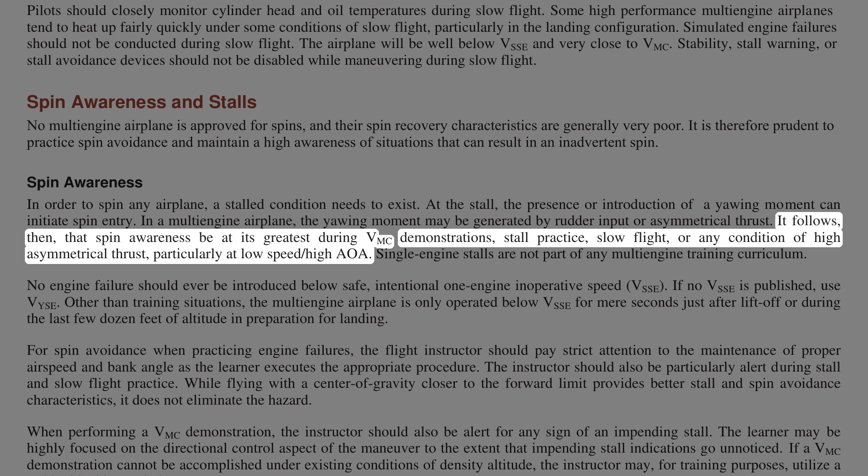At the stall, the presence or introduction of a yawing moment can initiate spin entry. In a multi-engine airplane, the yawing moment may be generated by rudder input or asymmetrical thrust. It follows, then, that spin awareness be at its greatest during VMC demonstrations, stall practice, slow flight, or any condition of high asymmetrical thrust, particularly at low speed, high AOA.

Single-engine stalls are not part of any multi-engine training curriculum. No engine failure should ever be introduced below safe, intentional one-engine inoperative speed, VSSE. If no VSSE is published, use VYSE. Other than training situations, the multi-engine airplane is only operated below VSSE for mere seconds just after liftoff, or during the last few dozen feet of altitude in preparation for landing.

For spin avoidance when practicing engine failures, the flight instructor should pay strict attention to the maintenance of proper airspeed and bank angle as the learner executes the appropriate procedure. The instructor should also be particularly alert during stall and slow flight practice. While flying with a center of gravity closer to the forward limit provides better stall and spin avoidance characteristics, it does not eliminate the hazard.

When performing a VMC demonstration, the instructor should also be alert for any sign of an impending stall. The learner may be highly focused on the directional control aspect of the maneuver to the extent that impending stall indications go unnoticed. If a VMC demonstration cannot be accomplished under existing conditions of density altitude, the instructor may, for training purposes, utilize a rudder blocking technique.

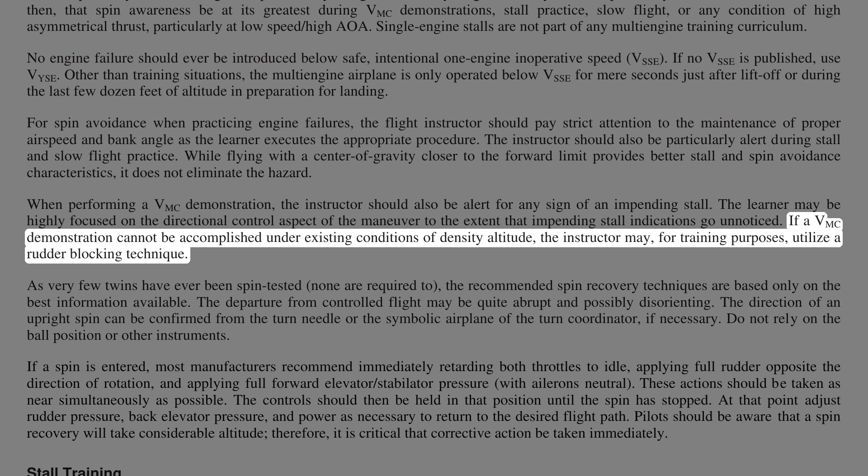As very few twins have ever been spin tested, and none are required to be, the recommended spin recovery techniques are based only on the best information available. The departure from controlled flight may be quite abrupt and possibly disorienting.

The direction of an upright spin can be confirmed from the turn needle or the symbolic airplane of the turn coordinator, if necessary. Do not rely on the ball position or other instruments.

If a spin is entered, most manufacturers recommend immediately retarding both throttles to idle, applying full rudder opposite the direction of rotation, and applying full forward elevator or stabilator pressure, with ailerons neutral. These actions should be taken as near simultaneously as possible.

The control should then be held in that position until the spin has stopped. At that point, adjust rudder pressure, back elevator pressure, and power as necessary to return to the desired flight path. Pilots should be aware that a spin recovery will take considerable altitude; therefore, it is critical that corrective action be taken immediately. Stall training.

It is recommended that stalls be practiced at an altitude that allows recovery no lower than 3,000 feet AGL for multi-engine airplanes, or higher if recommended by the AFM/POH. Losing altitude during recovery from a stall is to be expected.

Stall characteristics vary among multi-engine airplanes just as they do with single-engine airplanes, and therefore a pilot should be familiar with them. Yet the most important stall recovery step in a multi-engine airplane is the same as it is in all airplanes: reduce the angle of attack, AOA. For reference, the stall recovery procedure described in Chapter 5 is included in Figure 13-9.

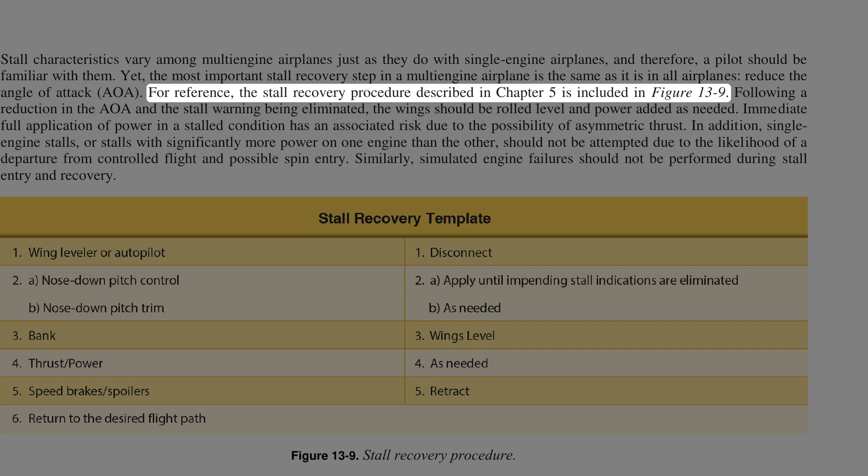Following a reduction in the AOA and the stall warning being eliminated, the wings should be rolled level and power added as needed. Immediate full application of power in a stalled condition has an associated risk due to the possibility of asymmetric thrust. In addition, single-engine stalls, or stalls with significantly more power on one engine than the other, should not be attempted due to the likelihood of a departure from controlled flight and possible spin entry. Similarly, simulated engine failures should not be performed during stall entry and recovery.

Power-off approach to stall, approach and landing. A power-off approach to stall is trained and checked to simulate problematic approach and landing scenarios.

A power-off approach to stall may be performed with wings level, or from shallow turns up to 20 degrees of bank. To initiate a power-off approach to stall maneuver, the area surrounding the airplane should first be cleared for possible traffic. The airplane should then be slowed and configured for an approach and landing. A stabilized descent should be established, approximately 500 fpm, and trim adjusted. A turn should be initiated at this point, if desired.

The pilot should then smoothly increase the AOA to induce a stall warning. Power is reduced further during this phase, and trimming should cease at speeds slower than takeoff. When the airplane reaches the stall warning, e.g., aural alert, buffet, etc.

Full stall. It is not recommended that full stalls be practiced unless a qualified flight instructor is present. A power-off or power-on full stall should only be practiced in a structured lesson with clear learning objectives and cautions discussed. The goals of the training are:

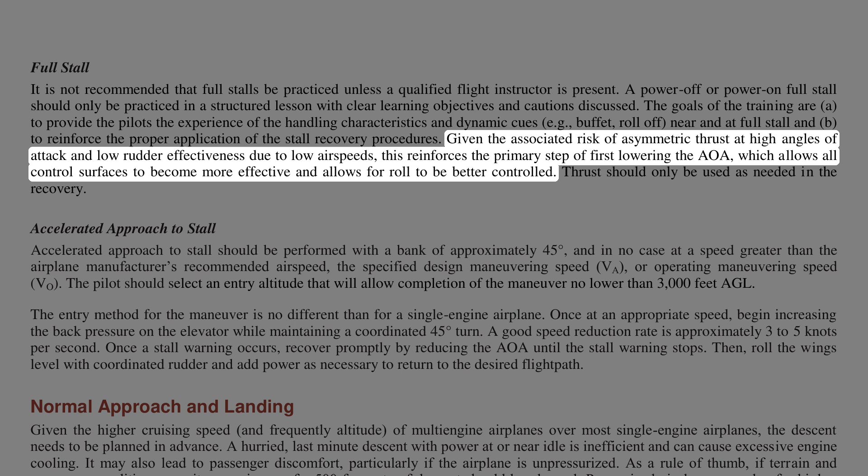Given the associated risk of asymmetric thrust at high angles of attack and low rudder effectiveness due to low airspeeds, this reinforces the primary step of first lowering the AOA, which allows all control surfaces to become more effective and allows for roll to be better controlled. Thrust should only be used as needed in the recovery.

Accelerated approach to stall. Accelerated approach to stall should be performed with a bank of approximately 45 degrees, and in no case at a speed greater than the airplane manufacturer's recommended airspeed, the specified design maneuvering speed, VA, or operating maneuvering speed, VO. The pilot should select an entry altitude that will allow completion of the maneuver no lower than 3,000 feet AGL. The entry method for the maneuver is no different than for a single-engine airplane.

Once at an appropriate speed, begin increasing the back pressure on the elevator while maintaining a coordinated 45 degree turn. A good speed reduction rate is approximately 3 to 5 knots per second. Once a stall warning occurs, recover promptly by reducing the AOA until the stall warning stops. Then, roll the wings level with coordinated rudder and add power as necessary to return to the desired flight path.

Normal approach and landing. Given the higher cruising speed, and frequently altitude, of multi-engine airplanes over most single-engine airplanes, the descent needs to be planned in advance. A hurried, last-minute descent with power at or near idle is inefficient and can cause excessive engine cooling. It may also lead to passenger discomfort, particularly if the airplane is unpressurized.

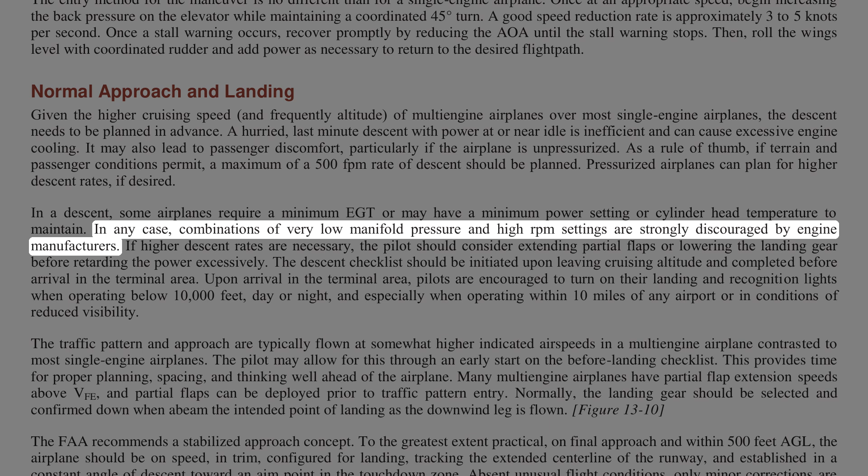As a rule of thumb, if terrain and passenger conditions permit, a maximum of a 500 fpm rate of descent should be planned. Pressurized airplanes can plan for higher descent rates if desired. In a descent, some airplanes require a minimum EGT or may have a minimum power setting or cylinder head temperature to maintain. In any case, combinations of very low manifold pressure and high RPM settings are strongly discouraged by engine manufacturers.

If higher descent rates are necessary, the pilot should consider extending partial flaps or lowering the landing gear before retarding the power excessively. The descent checklist should be initiated upon leaving cruising altitude and completed before arrival in the terminal area. Upon arrival in the terminal area, pilots are encouraged to turn on their landing and recognition lights when operating below 10,000 feet, day or night, and especially when operating within 10 miles of any airport or in conditions of reduced visibility.

The traffic pattern and approach are typically flown at somewhat higher indicated airspeeds in a multi-engine airplane contrasted to most single-engine airplanes. The pilot may allow for this through an early start on the before landing checklist. This provides time for proper planning, spacing, and thinking well ahead of the airplane.

Many multi-engine airplanes have partial flap extension speeds above VFE, and partial flaps can be deployed prior to traffic pattern entry. Normally, the landing gear should be selected and confirmed down when abeam the intended point of landing as the downwind leg is flown.

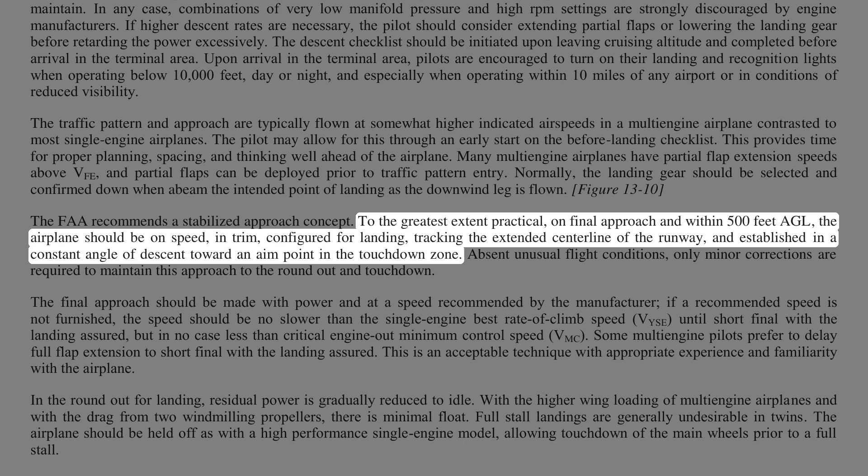The FAA recommends a stabilized approach concept, to the greatest extent practical. On final approach and within 500 feet AGL, the airplane should be on speed, in trim, configured for landing, tracking the extended centerline of the runway, and established in a constant angle of descent toward an aim point in the touchdown zone. Absent unusual flight conditions, only minor corrections are required to maintain this approach to the round out and touchdown.

The final approach should be made with power and at a speed recommended by the manufacturer. If a recommended speed is not furnished, the speed should be no slower than the single-engine best rate of climb speed, VYSE, until short final with the landing assured, but in no case less than critical engine out minimum control speed, VMC.

Some multi-engine pilots prefer to delay full flap extension to short final with the landing assured. This is an acceptable technique with appropriate experience and familiarity with the airplane. In the round out for landing, residual power is gradually reduced to idle. With the higher wing loading of multi-engine airplanes and with the drag from two windmilling propellers, there is minimal float.

Full stall landings are generally undesirable in twins. The airplane should be held off as with a high-performance single-engine model, allowing touchdown of the main wheels prior to a full stall. Under favorable wind and runway conditions, the nose wheel can be held off for best aerodynamic braking.

Even as the nose wheel is gently lowered to the runway centerline, continued elevator back pressure greatly assists the wheel brakes in stopping the airplane. If runway length is critical, or with a strong crosswind, or if the surface is contaminated with water, ice, or snow, it is undesirable to rely solely on aerodynamic braking after touchdown.

The full weight of the airplane should be placed on the wheels as soon as practicable. The wheel brakes are more effective than aerodynamic braking alone in decelerating the airplane. Once on the ground, elevator back pressure should be used to place additional weight on the main wheels. When necessary, wing flap retraction also adds additional weight to the wheels and improves braking effectivity.

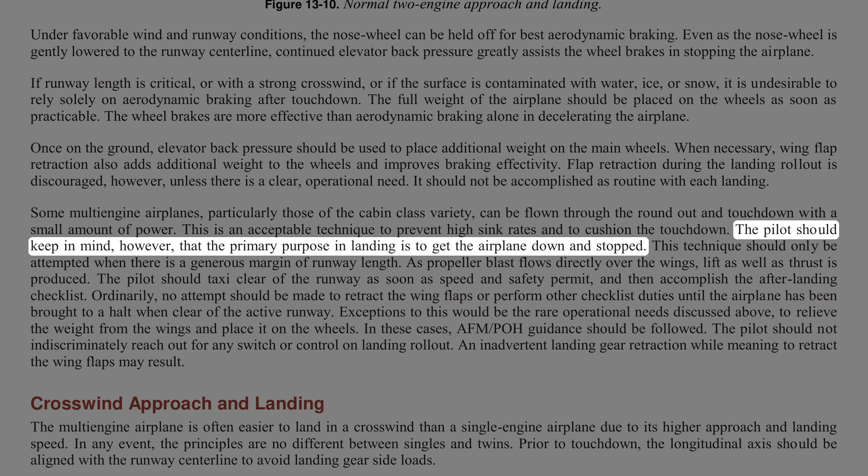Some multi-engine airplanes, particularly those of the cabin class variety, can be flown through the round out and touchdown with a small amount of power. This is an acceptable technique to prevent high sink rates and to cushion the touchdown. The pilot should keep in mind, however, that the primary purpose in landing is to get the airplane down and stopped. This technique should only be attempted when there is a generous margin of runway length.

As propeller blast flows directly over the wings, lift as well as thrust is produced. The pilot should taxi clear of the runway as soon as speed and safety permit, and then accomplish the after-landing checklist. Ordinarily, no attempt should be made to retract the wing flaps or perform other checklist duties until the airplane has been brought to a halt when clear of the active runway.

Exceptions to this would be the rare operational needs discussed above, to relieve the weight from the wings and place it on the wheels. In these cases, AFM/POH guidance should be followed. The pilot should not indiscriminately reach out for any switch or control on landing rollout. An inadvertent landing gear retraction while meaning to retract the wing flaps may result.

Crosswind approach and landing. The multi-engine airplane is often easier to land in a crosswind than a single-engine airplane due to its higher approach and landing speed. In any event, the principles are no different between singles and twins. Prior to touchdown, the longitudinal axis should be aligned with the runway centerline to avoid landing gear side loads.

The two primary methods, crab and wing low, are typically used in conjunction with each other. As soon as the airplane rolls out onto final approach, the crab angle to track the extended runway centerline is established.

This is coordinated flight with adjustments to heading to compensate for wind drift either left or right. Prior to touchdown, the transition to a sideslip is made with the upwind wing lowered and opposite rudder applied to prevent a turn. The airplane touches down on the landing gear of the upwind wing first, followed by that of the downwind wing, and then the nose gear.

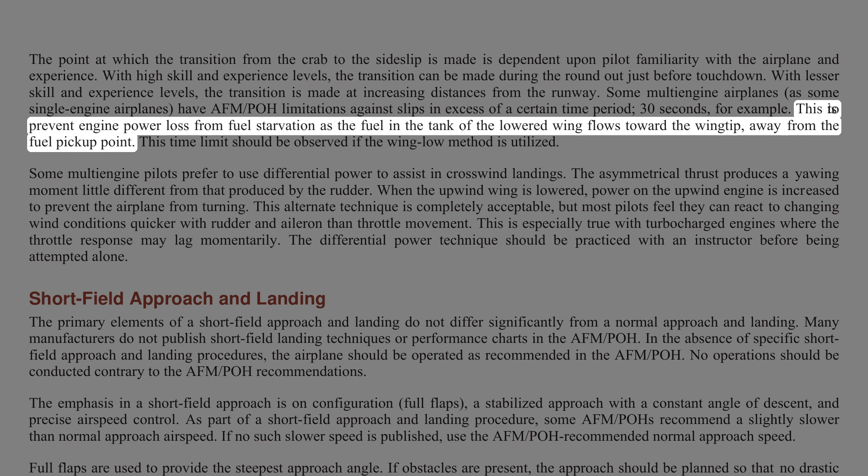Some multi-engine airplanes, as some single-engine airplanes, have AFM/POH limitations against slips in excess of a certain time period, 30 seconds for example. This is to prevent engine power loss from fuel starvation as the fuel in the tank of the lowered wing flows toward the wingtip, away from the fuel pickup point. This time limit should be observed if the wing low method is utilized.

Some multi-engine pilots prefer to use differential power to assist in crosswind landings. The asymmetrical thrust produces a yawing moment little different from that produced by the rudder. When the upwind wing is lowered, power on the upwind engine is increased to prevent the airplane from turning.

This alternate technique is completely acceptable, but most pilots feel they can react to changing wind conditions quicker with rudder and aileron than throttle movement. This is especially true with turbocharged engines, where the throttle response may lag momentarily. The differential power technique should be practiced with an instructor before being attempted alone.

Short field approach and landing. The primary elements of a short field approach and landing do not differ significantly from a normal approach and landing.

Many manufacturers do not publish short field landing techniques or performance charts in the AFM/POH. In the absence of specific short field approach and landing procedures, the airplane should be operated as recommended in the AFM/POH. No operations should be conducted contrary to the AFM/POH recommendations.

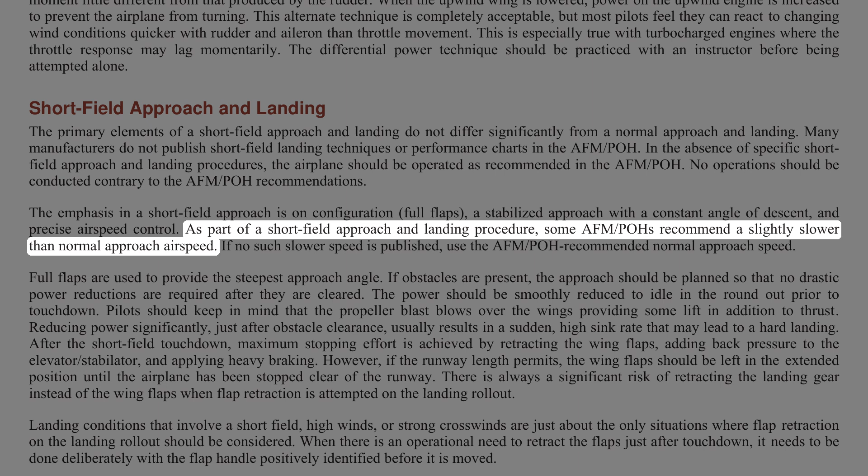The emphasis in a short field approach is on configuration, full flaps, a stabilized approach with a constant angle of descent, and precise airspeed control. As part of a short field approach and landing procedure, some AFM/POHs recommend a slightly slower than normal approach airspeed. If no such slower speed is published, use the AFM/POH recommended normal approach speed.

Full flaps are used to provide the steepest approach angle. If obstacles are present, the approach should be planned so that no drastic power reductions are required after they are cleared. The power should be smoothly reduced to idle in the round out prior to touchdown.

Pilots should keep in mind that the propeller blast blows over the wings, providing some lift in addition to thrust. Reducing power significantly just after obstacle clearance usually results in a sudden, high sink rate that may lead to a hard landing.

After the short field touchdown, maximum stopping effort is achieved by retracting the wing flaps, adding back pressure to the elevator or stabilator, and applying heavy braking. However, if the runway length permits, the wing flaps should be left in the extended position until the airplane has been stopped clear of the runway.

There is always a significant risk of retracting the landing gear instead of the wing flaps when flap retraction is attempted on the landing rollout.

Landing conditions that involve a short field, high winds, or strong crosswinds are just about the only situations where flap retraction on the landing rollout should be considered. When there is an operational need to retract the flaps just after touchdown, it needs to be done deliberately, with the flap handle positively identified before it is moved.

Go around. When the decision to go around is made, the throttle should be advanced to takeoff power and pitch adjusted to arrest the sink rate. With adequate airspeed, the airplane should be placed in a climb pitch attitude.

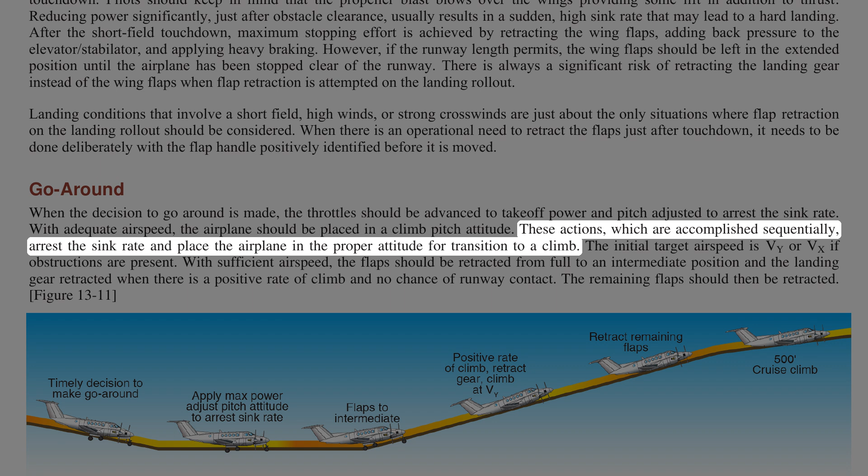These actions, which are accomplished sequentially, arrest the sink rate and place the airplane in the proper attitude for transition to a climb. The initial target airspeed is Vy, or Vx if obstructions are present.

With sufficient airspeed, the flaps should be retracted from full to an intermediate position and the landing gear retracted when there is a positive rate of climb and no chance of runway contact. The remaining flaps should then be retracted.

If the go-around was initiated due to conflicting traffic on the ground or aloft, the pilot should consider maneuvering to the side to keep the conflicting traffic in sight.

This may involve a slight turn to offset from the runway landing area. If the airplane was in trim for the landing approach when the go-around was commenced, it soon requires a great deal of forward elevator or stabilator pressure as the airplane accelerates away in a climb. The pilot should apply appropriate forward pressure to maintain the desired pitch attitude.

Trim should be commenced immediately. The balked landing checklist should be reviewed as workload permits.

Flaps should be retracted before the landing gear for two reasons. First, on most airplanes, full flaps produce more drag than the extended landing gear. Secondly, the airplane tends to settle somewhat with flap retraction, and the landing gear should be down in the event of an inadvertent, momentary touchdown.

Many multi-engine airplanes have a landing gear retraction speed significantly less than the extension speed. Care should be exercised during the go-around not to exceed the retraction speed.

If the pilot desires to return for a landing, it is essential to re-accomplish the entire before landing checklist. An interruption to a pilot's habit patterns, such as a go-around, is a classic scenario for a subsequent gear-up landing.

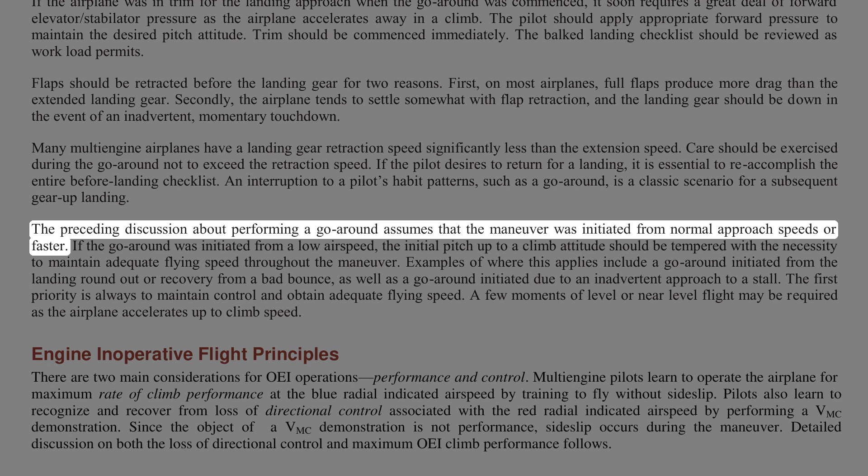The preceding discussion about performing a go-around assumes that the maneuver was initiated from normal approach speeds or faster. If the go-around was initiated from a low airspeed, the initial pitch-up to a climb attitude should be tempered with the necessity to maintain adequate flying speed throughout the maneuver.

Examples of where this applies include a go-around initiated from the landing round out or recovery from a bad bounce, as well as a go-around initiated due to an inadvertent approach to a stall. The first priority is always to maintain control and obtain adequate flying speed. A few moments of level or near-level flight may be required as the airplane accelerates up to climb speed.

Engine inoperative flight principles. There are two main considerations for OEI operations: performance and control. Multi-engine pilots learn to operate the airplane for maximum rate of climb performance at the blue radial indicated airspeed by training to fly without sideslip.

Pilots also learn to recognize and recover from loss of directional control associated with the red radial indicated airspeed by performing a VMC demonstration. Since the object of a VMC demonstration is not performance, sideslip occurs during the maneuver. Detailed discussion on both the loss of directional control and maximum OEI climb performance follows.

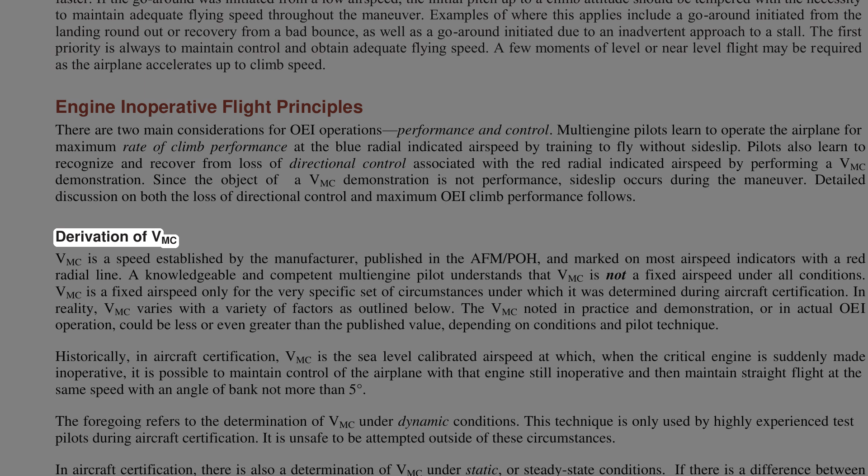Derivation of VMC. VMC is a speed established by the manufacturer, published in the AFM or POH, and marked on most airspeed indicators with a red radial line. A knowledgeable and competent multi-engine pilot understands that VMC is not a fixed airspeed under all conditions. VMC is a fixed airspeed only for the very specific set of circumstances under which it was determined during aircraft certification. In reality, VMC varies with a variety of factors as outlined below.

The VMC noted in practice and demonstration, or in actual OEI operation, could be less or even greater than the published value, depending on conditions and pilot technique.

Historically, in aircraft certification, VMC is the sea-level calibrated airspeed at which, when the critical engine is suddenly made inoperative, it is possible to maintain control of the airplane with that engine still inoperative and then maintain straight flight at the same speed with an angle of bank not more than 5 degrees.

The foregoing refers to the determination of VMC under dynamic conditions. This technique is only used by highly experienced test pilots during aircraft certification. It is unsafe to be attempted outside of these circumstances.

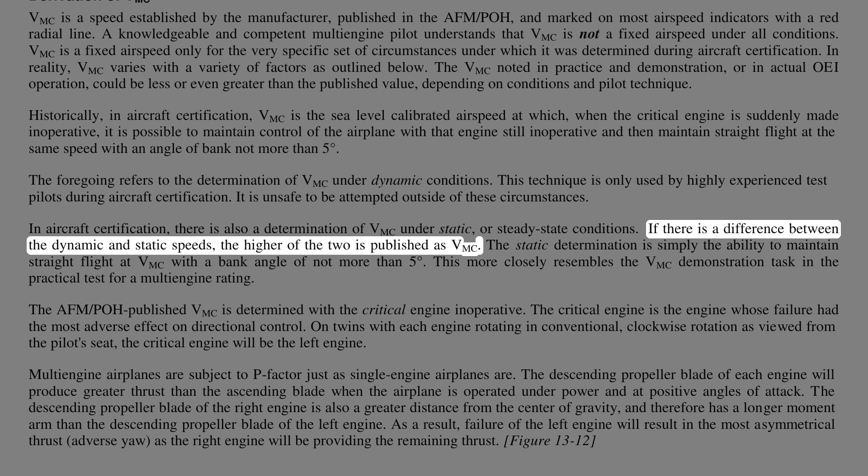In aircraft certification, there is also a determination of VMC under static or steady-state conditions. If there is a difference between the dynamic and static speeds, the higher of the two is published as VMC. The static determination is simply the ability to maintain straight flight at VMC with a bank angle of not more than 5 degrees. This more closely resembles the VMC demonstration task in the practical test for a multi-engine rating.

The AFM or POH published VMC is determined with the critical engine inoperative. The critical engine is the engine whose failure has the most adverse effect on directional control. On twins with each engine rotating in conventional, clockwise rotation as viewed from the pilot's seat, the critical engine will be the left engine. Multi-engine airplanes are subject to P-factor just as single-engine airplanes are.

The descending propeller blade of each engine will produce greater thrust than the ascending blade when the airplane is operated under power and at positive angles of attack. The descending propeller blade of the right engine is also a greater distance from the center of gravity, and therefore has a longer moment arm than the descending propeller blade of the left engine.

As a result, failure of the left engine will result in the most asymmetrical thrust and adverse yaw, as the right engine will be providing the remaining thrust. Many twins are designed with a counter-rotating right engine. With this design, the degree of asymmetrical thrust is the same with either engine inoperative. No engine is more critical than the other, and a VMC demonstration may be performed with either engine windmilling.

The following points describe how several factors affect VMC speed for multi-engine airplanes often used during training, which were certified under historical 14 CFR Part 23, Section 23.149. They also describe the conditions used to determine the manufacturer's published speed. Historically, dynamic VMC has been determined under these conditions: maximum available takeoff power initially on each engine, Section 23.149, B1.

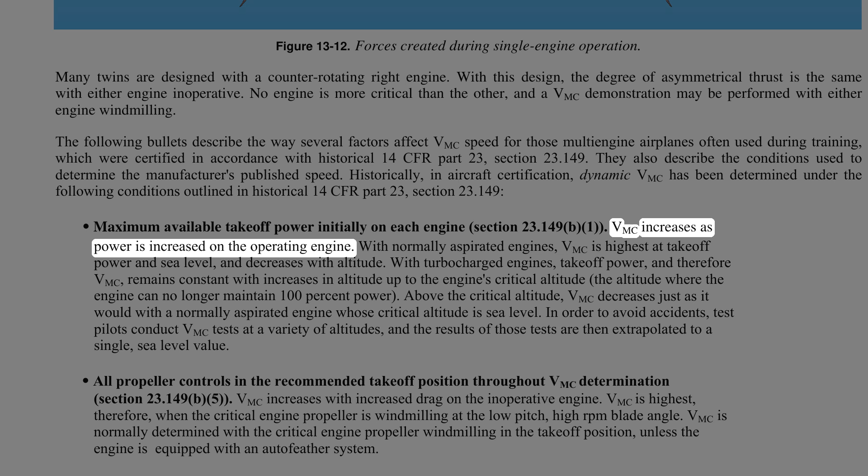VMC increases as power is increased on the operating engine. With normally aspirated engines, VMC is highest at takeoff power and sea level, and decreases with altitude. With turbocharged engines, takeoff power, and therefore VMC, remains constant with increases in altitude up to the engine's critical altitude, the altitude where the engine can no longer maintain 100% power. Above the critical altitude, VMC decreases just as it would with a normally aspirated engine whose critical altitude is sea level. In order to avoid accidents, test pilots conduct VMC tests at a variety of altitudes, and the results are then extrapolated to a single sea level value.

All propeller controls are in the recommended takeoff position throughout VMC determination, Section 23.149, B5. VMC increases with increased drag on the inoperative engine. VMC is highest, therefore, when the critical engine propeller is windmilling at the low pitch, high RPM blade angle. VMC is normally determined with the critical engine propeller windmilling in the takeoff position, unless the engine is equipped with an autofeather system.

Most unfavorable weight and center of gravity position, Section 23.149, B. VMC increases as the center of gravity is moved aft. The moment arm of the rudder is reduced, and therefore its effectivity is reduced, as the CG is moved aft. For a typical light twin, the aftmost CG limit is the most unfavorable CG position. Historically, 14 CFR Part 23 calls for VMC to be determined at the most unfavorable weight. For twins certificated under CAR 3 or early 14 CFR Part 23, the weight at which VMC was determined was not specified. VMC increases as weight is reduced.

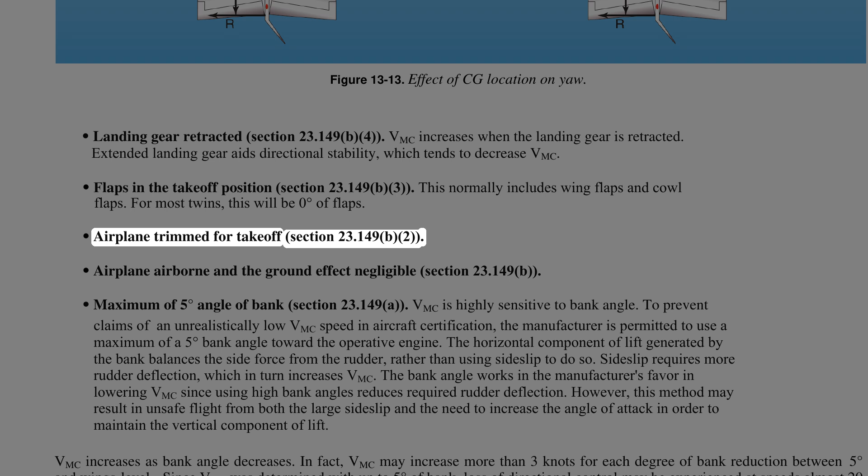Airplane trimmed for takeoff, Section 23.149, B2. Airplane airborne and the ground effect negligible, Section 23.149, B. Maximum of 5 degrees angle of bank, Section 23.149, A.

VMC is highly sensitive to bank angle. To prevent claims of an unrealistically low VMC speed in aircraft certification, the manufacturer is permitted to use a maximum of 5 degrees bank angle toward the operative engine. The horizontal component of lift generated by the bank balances the side force from the rudder, rather than using sideslip to do so. Sideslip requires more rudder deflection, which in turn increases VMC. The bank angle works in the manufacturer's favor in lowering VMC since using high bank angles reduces required rudder deflection. However, this method may result in unsafe flight from both the large sideslip and the need to increase the angle of attack in order to maintain the vertical component of lift.

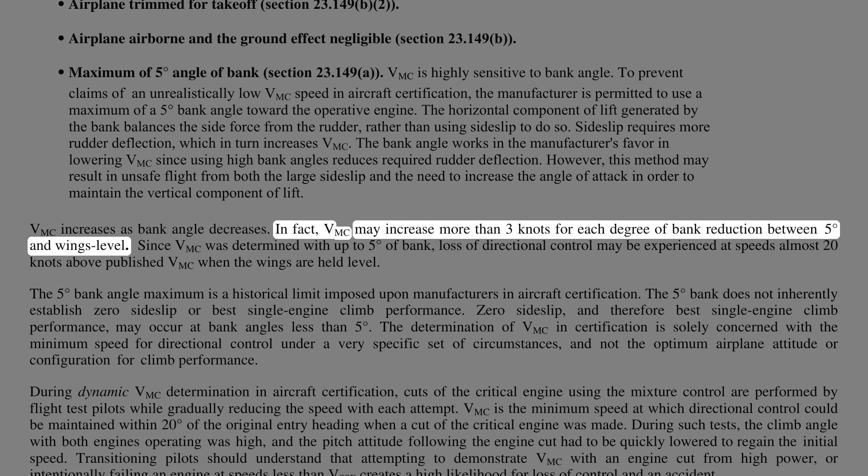VMC increases as bank angle decreases. In fact, VMC may increase more than 3 knots for each degree of bank reduction between 5 degrees and wings level. Since VMC was determined with up to 5 degrees of bank, loss of directional control may be experienced at speeds almost 20 knots above published VMC when the wings are held level.

The 5 degrees bank angle maximum is a historical limit imposed upon manufacturers in aircraft certification. The 5 degrees bank does not inherently establish zero sideslip or best single-engine climb performance. Zero sideslip, and therefore best single-engine climb performance, may occur at bank angles less than 5 degrees. The determination of VMC in certification is solely concerned with the minimum speed for directional control under a very specific set of circumstances, and not the optimum airplane attitude or configuration for climb performance.

During dynamic VMC determination in aircraft certification, cuts of the critical engine using the mixture control are performed by flight test pilots while gradually reducing the speed with each attempt. VMC is the minimum speed at which directional control could be maintained within 20 degrees of the original entry heading when a cut of the critical engine was made.

During such tests, the climb angle with both engines operating was high, and the pitch attitude following the engine cut had to be quickly lowered to regain the initial speed. Transitioning pilots should understand that attempting to demonstrate VMC with an engine cut from high power, or intentionally failing an engine at speeds less than VSSE, creates a high likelihood for loss of control and an accident.

VMC demo: the actual demonstration of VMC recovery in flight training more closely resembles static VMC determination in aircraft certification. For a demonstration that avoids the hazard of unintended contact with the ground, the pilot selects an altitude that will allow performance of the maneuver at least 3,000 feet AGL.

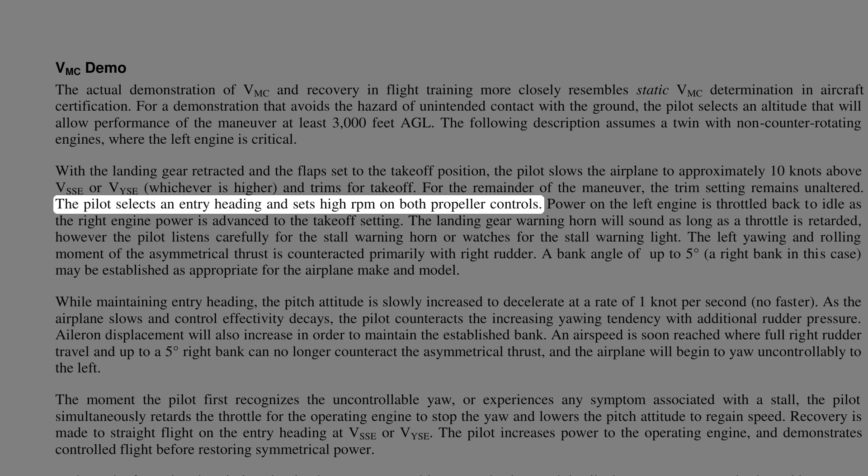The pilot selects an entry heading and sets high RPM on both propeller controls. Power on the left engine is throttled back to idle as the right engine power is advanced to the takeoff setting. The landing gear warning horn will sound as long as a throttle is retarded. However, the pilot listens carefully for the stall warning horn or watches for the stall warning light.

The left yawing and rolling moment of the asymmetrical thrust is counteracted primarily with right rudder. A bank angle of up to 5 degrees, a right bank in this case, may be established as appropriate for the airplane make and model.

While maintaining entry heading, the pitch attitude is slowly increased to decelerate at a rate of 1 knot per second, no faster. As the airplane slows and control effectivity decays, the pilot counteracts the increasing yawing tendency with additional rudder pressure. Aileron displacement will also increase in order to maintain the established bank.

An airspeed is soon reached where full right rudder travel and up to a 5 degree right bank can no longer counteract the asymmetrical thrust, and the airplane will begin to yaw uncontrollably to the left.

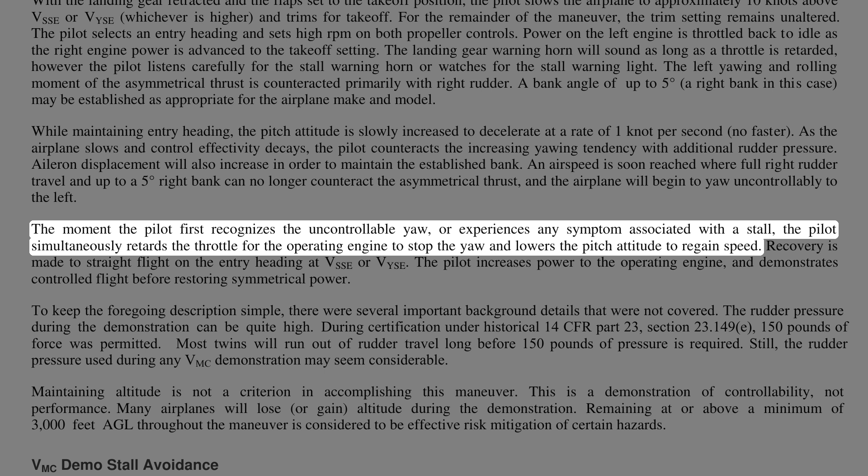The moment the pilot first recognizes the uncontrollable yaw, or experiences any symptom associated with a stall, the pilot simultaneously retards the throttle for the operating engine to stop the yaw and lowers the pitch attitude to regain speed. Recovery is made to straight flight on the entry heading at VSSE or VYSE. The pilot increases power to the operating engine and demonstrates controlled flight before restoring symmetrical power.

To keep the foregoing description simple, there were several important background details that were not covered. The rudder pressure during the demonstration can be quite high. During certification under historical 14 CFR Part 23, section 23.149 E, 150 pounds of force was permitted. Most twins will run out of rudder travel long before 150 pounds of pressure is required. Still, the rudder pressure used during any VMC demonstration may seem considerable.

Maintaining altitude is not a criterion in accomplishing this maneuver. This is a demonstration of controllability, not performance. Many airplanes will lose, or gain, altitude during the demonstration. Remaining at or above a minimum of 3,000 feet AGL throughout the maneuver is considered to be effective risk mitigation of certain hazards.

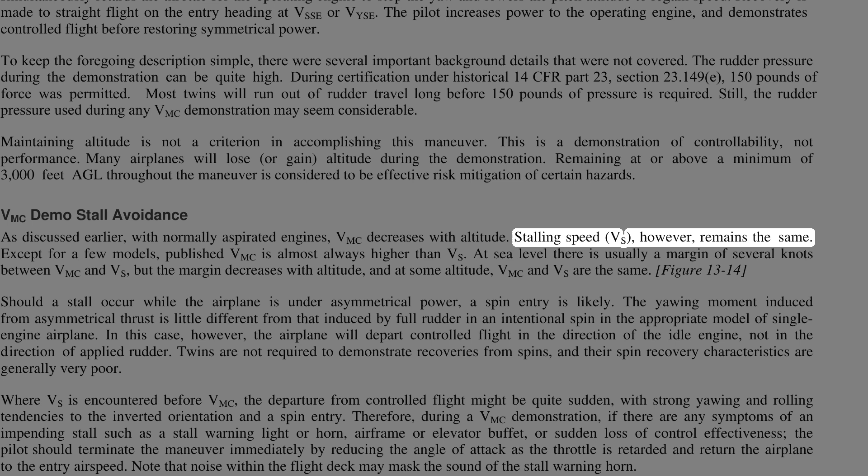VMC demo stall avoidance: as discussed earlier, with normally aspirated engines, VMC decreases with altitude. Stalling speed, VS, however, remains the same. Except for a few models, published VMC is almost always higher than VS. At sea level there is usually a margin of several knots between VMC and VS, but the margin decreases with altitude, and at some altitude, VMC and VS are the same.

Should a stall occur while the airplane is under asymmetrical power, a spin entry is likely. The yawing moment induced from asymmetrical thrust is little different from that induced by full rudder in an intentional spin in the appropriate model of single-engine airplane. In this case, however, the airplane will depart controlled flight in the direction of the idle engine, not in the direction of applied rudder. Twins are not required to demonstrate recoveries from spins, and their spin recovery characteristics are generally very poor. Where VS is encountered before VMC, the departure from controlled flight might be quite sudden, with strong yawing and rolling tendencies to the inverted orientation and a spin entry.

Therefore, during a VMC demonstration, if there are any symptoms of an impending stall such as a stall warning light or horn, airframe or elevator buffet, or sudden loss of control effectiveness, the pilot should terminate the maneuver immediately by reducing the angle of attack as the throttle is retarded, and return the airplane to the entry airspeed.

Note that noise within the flight deck may mask the sound of the stall warning horn.

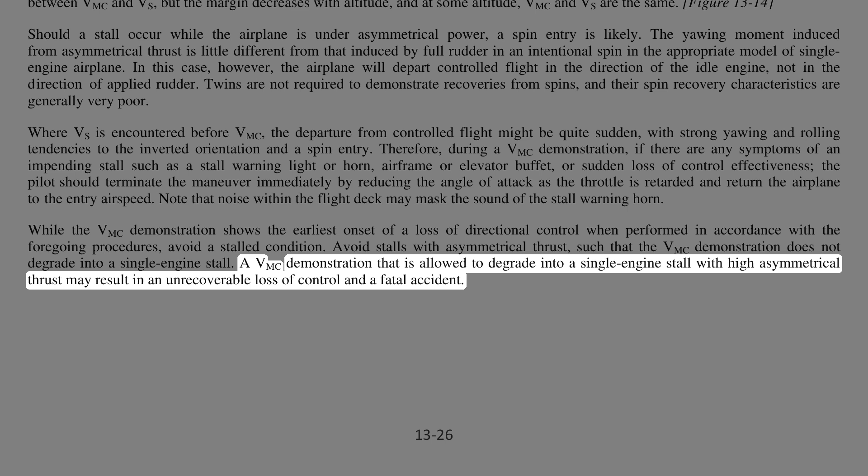While the VMC demonstration shows the earliest onset of a loss of directional control when performed in accordance with the foregoing procedures, avoid a stalled condition. Avoid stalls with asymmetrical thrust, such that the VMC demonstration does not degrade into a single-engine stall. A VMC demonstration that is allowed to degrade into a single-engine stall with high asymmetrical thrust may result in an unrecoverable loss of control and a fatal accident.

An actual demonstration of VMC may not be possible under certain conditions of density altitude, or with airplanes whose VMC is equal to or less than Vs. Under those circumstances, as a training technique, a demonstration of VMC may safely be conducted by artificially limiting rudder travel to simulate maximum available rudder.

A speed well above Vs, approximately 20 knots, is recommended when limiting rudder travel. The rudder limiting technique avoids the hazards of spinning as a result of stalling with high asymmetrical power, yet is effective in demonstrating the loss of directional control.

To reduce the risk of a loss of control, avoid performing any VMC demonstration from a high-pitch attitude with both engines operating and then reducing power on one engine.

OEI Climb Performance. Best OEI climb performance is obtained at VYSE with maximum available power and minimum drag. After the flaps and landing gear have been retracted and the propeller of the failed engine feathered, a key element in best climb performance is minimizing sideslip.

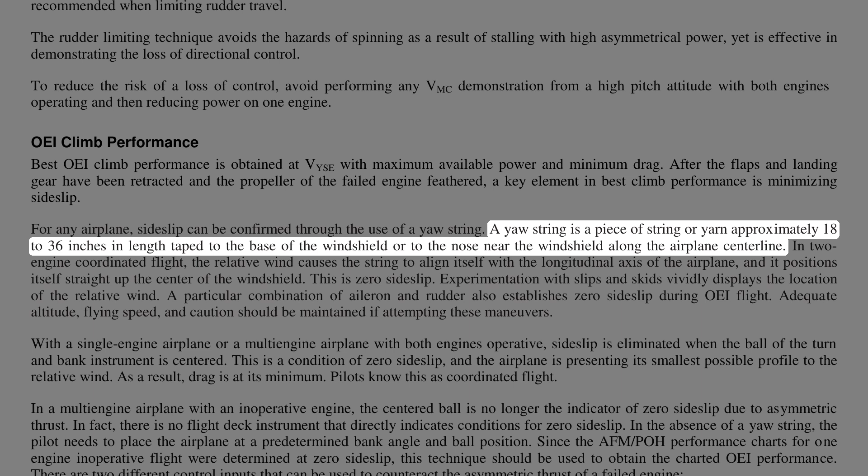For any airplane, sideslip can be confirmed through the use of a yaw string. A yaw string is a piece of string or yarn approximately 18 to 36 inches in length taped to the base of the windshield or to the nose near the windshield along the airplane centerline.

In two-engine coordinated flight, the relative wind causes the string to align itself with the longitudinal axis of the airplane, and it positions itself straight up the center of the windshield. This is zero sideslip. Experimentation with slips and skids vividly displays the location of the relative wind.

A particular combination of aileron and rudder also establishes zero sideslip during OEI flight. Adequate altitude, flying speed, and caution should be maintained if attempting these maneuvers.

With a single-engine airplane or a multi-engine airplane with both engines operative, sideslip is eliminated when the ball of the turn and bank instrument is centered. This is a condition of zero sideslip, and the airplane is presenting its smallest possible profile to the relative wind. As a result, drag is at its minimum. Pilots know this as coordinated flight.

In a multi-engine airplane with an inoperative engine, the centered ball is no longer the indicator of zero sideslip due to asymmetric thrust. In fact, there is no flight deck instrument that directly indicates conditions for zero sideslip.

In the absence of a yaw string, the pilot needs to place the airplane at a predetermined bank angle and ball position. Since the AFM/POH performance charts for one-engine inoperative flight were determined at zero sideslip, this technique should be used to obtain the charted OEI performance.

There are two different control inputs that can be used to counteract the asymmetric thrust of a failed engine: yaw from the rudder, and the horizontal component of lift that results from bank with the ailerons. Used individually, neither is correct. Used together in the proper combination, zero sideslip and best climb performance are achieved.

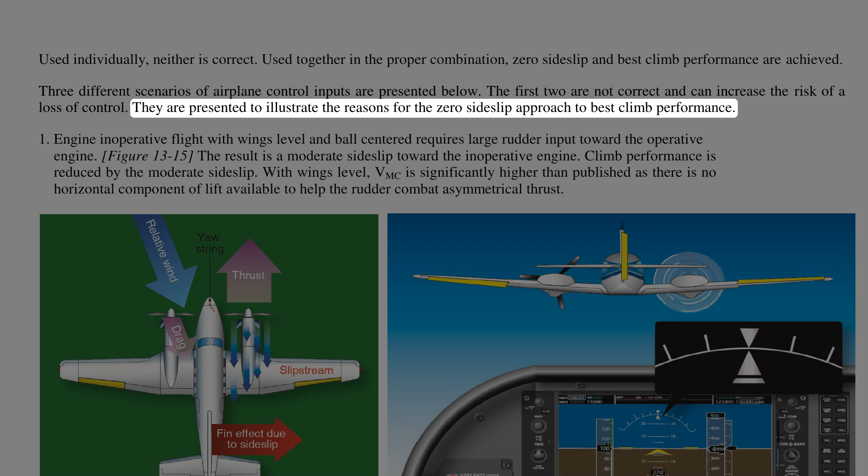Engine inoperative flight with wings level and ball centered requires large rudder input toward the operative engine. The result is a moderate sideslip toward the inoperative engine. Climb performance is reduced by the moderate sideslip. With wings level, VMC is significantly higher than published, as there is no horizontal component of lift available to help the rudder combat asymmetrical thrust.

Engine inoperative flight using ailerons alone requires an 8 to 10 degree bank angle toward the operative engine. This assumes no rudder input; the ball is displaced well toward the operative engine, and climb performance is greatly reduced by the large sideslip toward the operative engine. Due to the increased risk of loss of control, instructors should not normally demonstrate this.

Rudder and ailerons used together in the proper combination result in a bank of approximately 2 degrees toward the operative engine. The ball is displaced approximately one-third to one-half toward the operative engine. The result is zero sideslip and maximum climb performance. Any attitude other than zero sideslip increases drag, decreasing performance. VMC under these circumstances is higher than published, as less than the 5 degree bank certification limit is employed.

When bank angle is plotted against climb performance for a hypothetical twin, zero sideslip results in the best, however marginal, climb performance or the least rate of descent. Whether the airplane can climb depends on the weight of the airplane, density altitude, and pilot technique. If the pilot uses zero bank, all rudder to counteract yaw, climb performance degrades as a result of moderate sideslip. Using bank angle alone, no rudder, severely degrades climb performance as a result of a large sideslip.

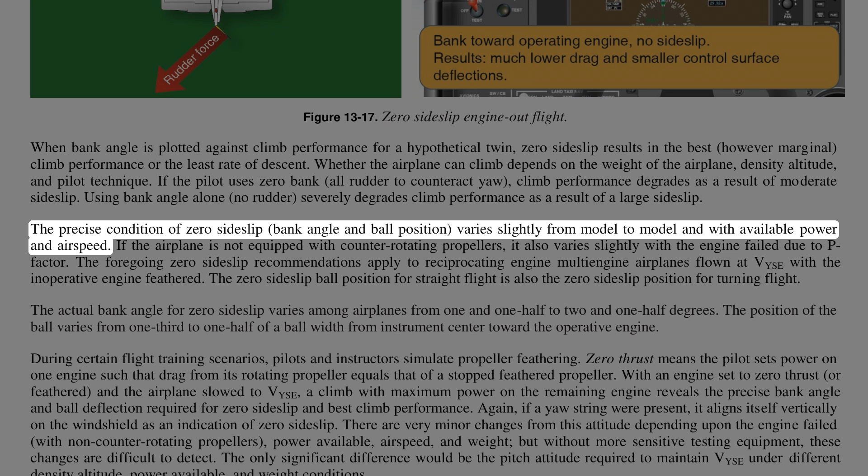The precise condition of zero sideslip, bank angle and ball position, varies slightly from model to model and with available power and airspeed. If the airplane is not equipped with counter-rotating propellers, it also varies slightly with the engine failed due to P-factor. The foregoing zero sideslip recommendations apply to reciprocating engine multi-engine airplanes flown at VYSE with the inoperative engine feathered. The zero sideslip ball position for straight flight is also the zero sideslip position for turning flight.

The actual bank angle for zero sideslip varies among airplanes from 1 1/2 to 2 1/2 degrees. The position of the ball varies from 1/3 to 1/2 of a ball width from instrument center toward the operative engine. During certain flight training scenarios, pilots and instructors simulate propeller feathering.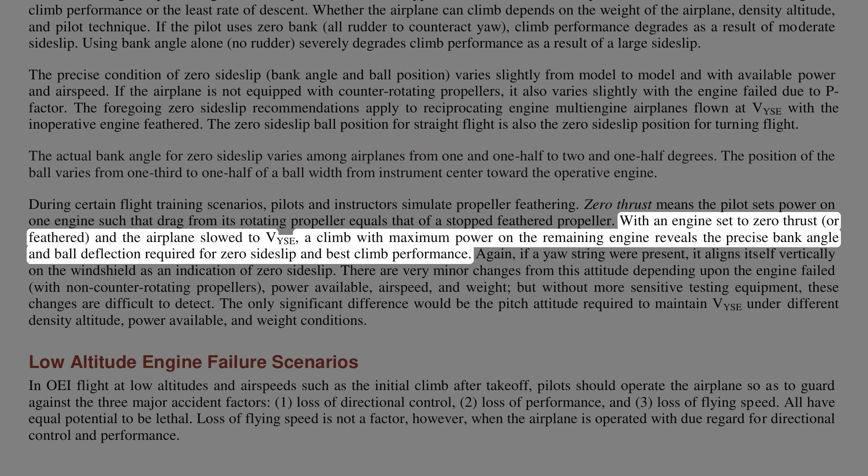Zero thrust means the pilot sets power on one engine such that drag from its rotating propeller equals that of a stopped, feathered propeller. With an engine set to zero thrust, or feathered, and the airplane slowed to VYSE, a climb with maximum power on the remaining engine reveals the precise bank angle and ball deflection required for zero sideslip and best climb performance.

Again, if a yaw string were present, it aligns itself vertically on the windshield as an indication of zero sideslip. There are very minor changes from this attitude depending upon the engine failed, with non-counter-rotating propellers, power available, airspeed, and weight. But without more sensitive testing equipment, these changes are difficult to detect. The only significant difference would be the pitch attitude required to maintain VYSE under different density altitude, power available, and weight conditions.

Low-altitude engine failure scenarios: In OEI flight at low altitudes and airspeeds, such as the initial climb after takeoff, pilots should operate the airplane so as to guard against the three major accident factors: one, loss of directional control; two, loss of performance; and three, loss of flying speed. All have equal potential to be lethal.

Loss of flying speed is not a factor, however, when the airplane is operated with due regard for directional control and performance. A takeoff or go-around is the most critical time to suffer an engine failure. The airplane will be slow, close to the ground, and may even have landing gear and flaps extended. Altitude and time is minimal.

Until feathered, the propeller of the failed engine is windmilling, producing a great deal of drag and yawing tendency. Airplane climb performance is marginal or even non-existent, and obstructions may lie ahead. An emergency contingency plan and safety brief should be clearly understood well before the takeoff roll commences.

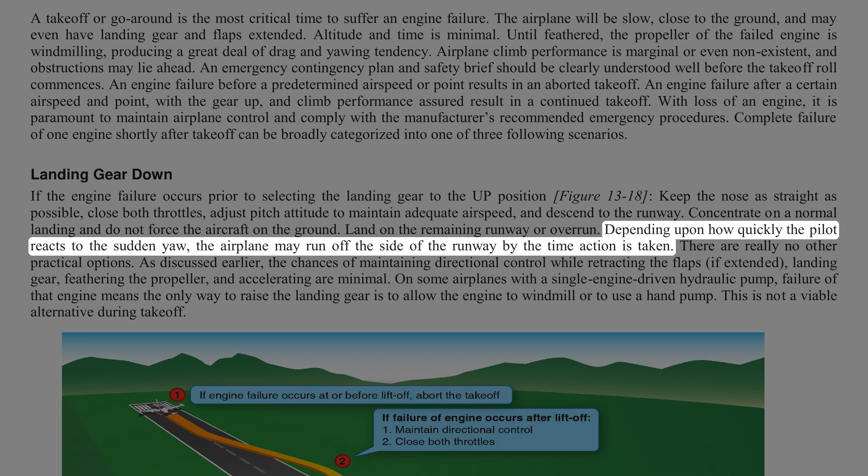Depending upon how quickly the pilot reacts to the sudden yaw, the airplane may run off the side of the runway by the time action is taken. There are really no other practical options.

As discussed earlier, the chances of maintaining directional control while retracting the flaps, if extended, landing gear, feathering the propeller, and accelerating are minimal. On some airplanes with a single engine-driven hydraulic pump, failure of that engine means the only way to raise the landing gear is to allow the engine to windmill or to use a hand pump. This is not a viable alternative during takeoff.

Landing gear control selected up, single engine climb performance inadequate: when operating near or above the single engine ceiling and an engine failure is experienced shortly after liftoff, a landing needs to be accomplished on whatever essentially lies ahead.

There is also the option of continuing ahead in a descent at VYSE with the remaining engine producing power, as long as the pilot is not tempted to remain airborne beyond the airplane's performance capability. Remaining airborne and bleeding off airspeed in a futile attempt to maintain altitude is almost invariably fatal. Landing under control is paramount.

The greatest hazard in a single-engine takeoff is attempting to fly when it is not within the performance capability of the airplane to do so. An accident is inevitable. Analysis of engine failures on takeoff reveals a very high success rate of off-airport engine inoperative landings when the airplane is landed under control. Analysis also reveals a very high fatality rate in stall spin accidents when the pilot attempts flight beyond the performance capability of the airplane.

As mentioned previously, if the airplane's landing gear retraction mechanism is dependent upon hydraulic pressure from a certain engine-driven pump, failure of that engine can mean a loss of hundreds of feet of altitude as the pilot either windmills the engine to provide hydraulic pressure to raise the gear or raises it manually with a backup pump.

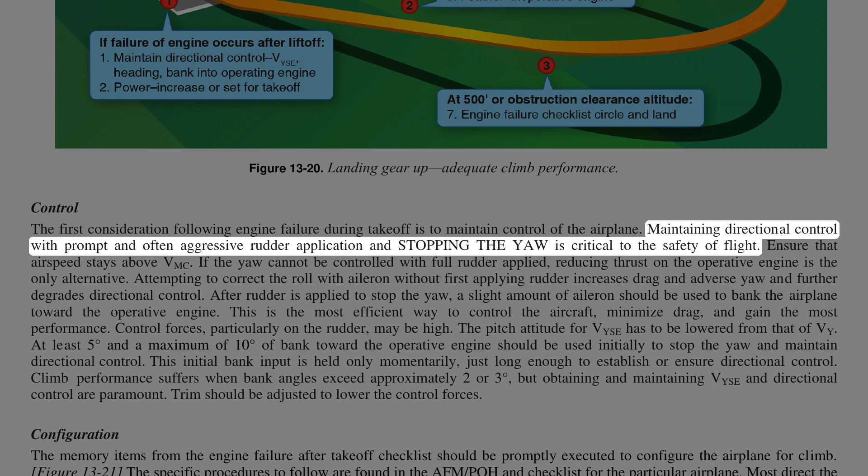Control. The first consideration following engine failure during takeoff is to maintain control of the airplane. Maintaining directional control with prompt and often aggressive rudder application and stopping the yaw is critical to the safety of flight. Ensure that airspeed stays above VMC. If the yaw cannot be controlled with full rudder applied, reducing thrust on the operative engine is the only alternative.

Attempting to correct the roll with aileron without first applying rudder increases drag and adverse yaw and further degrades directional control. After rudder is applied to stop the yaw, a slight amount of aileron should be used to bank the airplane toward the operative engine. This is the most efficient way to control the aircraft, minimize drag, and gain the most performance.

Control forces, particularly on the rudder, may be high. The pitch attitude for VYSE has to be lowered from that of VY. At least 5 degrees and a maximum of 10 degrees of bank toward the operative engine should be used initially to stop the yaw and maintain directional control. This initial bank input is held only momentarily, just long enough to establish or ensure directional control. Climb performance suffers when bank angles exceed approximately 2 or 3 degrees, but obtaining and maintaining VYSE and directional control are paramount. Trim should be adjusted to lower the control forces.

Configuration. The memory items from the engine failure after takeoff checklist should be promptly executed to configure the airplane for climb. The specific procedures to follow are found in the AFM, POH and checklist for the particular airplane. Most direct the pilot to assume VYSE, set takeoff power, retract the flaps and landing gear, identify, verify, and feather the failed engine. On some airplanes, the landing gear is to be retracted before the flaps.

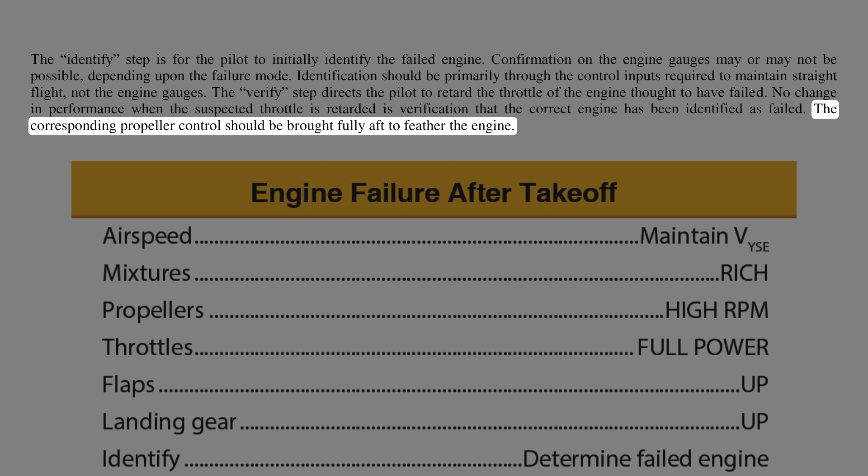Climb. As soon as directional control is established and the airplane configured for climb, the bank angle should be reduced to that producing best climb performance. Without specific guidance for zero sideslip, a bank of 2 degrees and 1/3 to 1/2 ball deflection on the slip/skid indicator toward the operative engine is suggested. VYSE is maintained with pitch control. As turning flight reduces climb performance, climb should be made straight ahead or with shallow turns to avoid obstacles to an altitude of at least 400 feet AGL before attempting a return to the airport.

Checklist. Having accomplished the memory items from the engine failure after takeoff checklist, the printed copy should be reviewed as time permits. The securing failed engine checklist should then be accomplished. Unless the pilot suspects an engine fire, the remaining items should be accomplished deliberately and without undue haste. Airplane control should never be sacrificed to execute the remaining checklists. The priority items have already been accomplished from memory. Other than closing the cowl flap of the failed engine, none of these items, if left undone, adversely affect airplane climb performance.

There is a distinct possibility of actuating an incorrect switch or control if the procedure is rushed. The pilot should concentrate on flying the airplane and extracting maximum performance. If an ATC facility is available, an emergency should be declared.

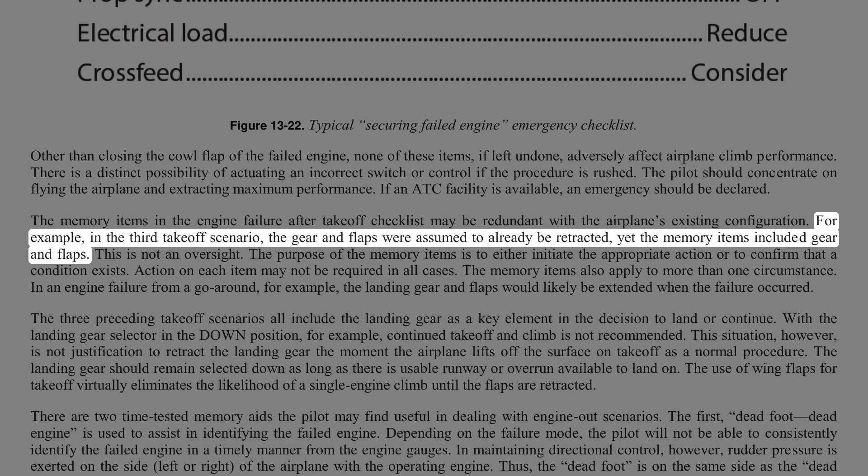The memory items in the engine failure after takeoff checklist may be redundant with the airplane's existing configuration. For example, in the third takeoff scenario, the gear and flaps were assumed to already be retracted, yet the memory items included gear and flaps. This is not an oversight.

The purpose of the memory items is to either initiate the appropriate action or to confirm that a condition exists. Action on each item may not be required in all cases. The memory items also apply to more than one circumstance.

In an engine failure from a go-around, for example, the landing gear and flaps would likely be extended when the failure occurred. The three preceding takeoff scenarios all include the landing gear as a key element in the decision to land or continue. With the landing gear selector in the down position, for example, continued takeoff and climb is not recommended.

This situation, however, is not justification to retract the landing gear the moment the airplane lifts off the surface on takeoff as a normal procedure. The landing gear should remain selected down as long as there is usable runway or overrun available to land on.

The use of wing flaps for takeoff virtually eliminates the likelihood of a single engine climb until the flaps are retracted. There are two time-tested memory aids the pilot may find useful in dealing with engine-out scenarios. The first, dead foot, dead engine, is used to assist in identifying the failed engine. Depending on the failure mode, the pilot will not be able to consistently identify the failed engine in a timely manner from the engine gauges.

In maintaining directional control, however, rudder pressure is exerted on the side, left or right, of the airplane with the operating engine. Thus, the dead foot is on the same side as the dead engine. Variations on this saying include idle foot, idle engine, and working foot, working engine.

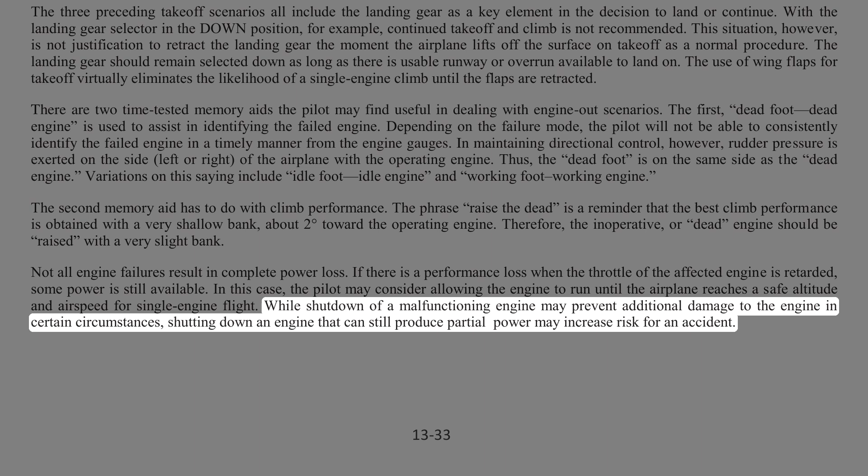Not all engine failures result in complete power loss. If there is a performance loss when the throttle of the affected engine is retarded, some power is still available. In this case, the pilot may consider allowing the engine to run until the airplane reaches a safe altitude and airspeed for single-engine flight. While shutdown of a malfunctioning engine may prevent additional damage in certain circumstances, shutting down an engine that can still produce partial power may increase risk for an accident.

Engine failure during flight. Engine failures well above the ground are handled differently than those occurring at lower speeds and altitudes. Cruise airspeed allows better airplane control and altitude, which may permit time for a possible diagnosis and remedy of the failure. Maintaining airplane control, however, is still paramount. Airplanes have been lost at altitude due to apparent fixation on the engine problem to the detriment of flying the airplane.

Not all engine failures or malfunctions are catastrophic in nature. Catastrophic meaning a major mechanical failure that damages the engine and precludes further engine operation. Many cases of power loss are related to fuel starvation, where restoration of power may be made with the selection of another tank. An orderly inventory of gauges and switches may reveal the problem.

Carburetor heat or alternate air can be selected. The affected engine may run smoothly on just one magneto or at a lower power setting. Altering the mixture may help. If fuel vapor formation is suspected, fuel boost pump operation may be used to eliminate flow and pressure fluctuations.

Although it is a natural desire among pilots to save an ailing engine with a precautionary shutdown, the engine should be left running if there is any doubt as to needing it for further safe flight.

Catastrophic failure accompanied by heavy vibration, smoke, blistering paint, or large trails of oil, on the other hand, indicate a critical situation. The affected engine should be feathered and the securing failed engine checklist completed. The pilot should divert to the nearest suitable airport and declare an emergency with ATC for priority handling.

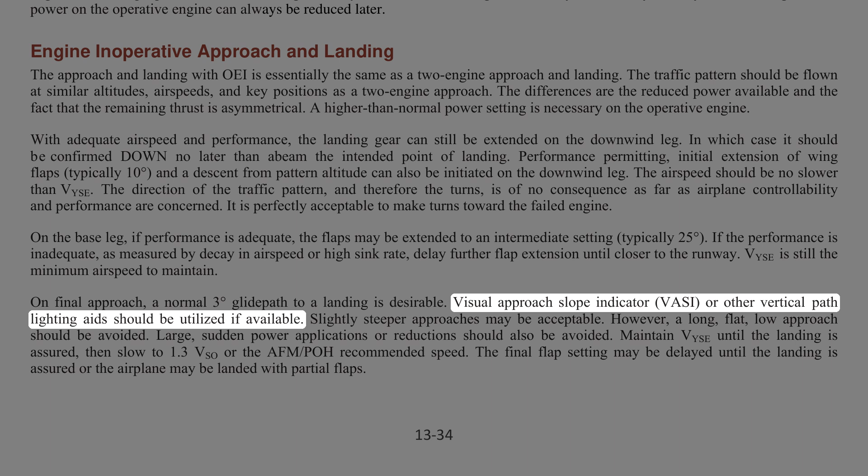On final approach, a normal 3 degree glide path to a landing is desirable. Visual approach slope indicator, VASI, or other vertical path lighting aids should be utilized if available. Slightly steeper approaches may be acceptable. However, a long, flat, low approach should be avoided. Large, sudden power applications or reductions should also be avoided.

Maintain VYSE until the landing is assured, then slow to 1.3 VSO or the AFM/POH recommended speed. The final flap setting may be delayed until the landing is assured, or the airplane may be landed with partial flaps. The airplane should remain in trim throughout. The pilot should be prepared, however, for a rudder trim change as the power of the operating engine is reduced to idle in the round out just prior to touchdown.

With drag from only one windmilling propeller, the airplane tends to float more than on a two-engine approach. Precise airspeed control therefore is essential, especially when landing on a short, wet, and/or slippery surface.

Some pilots favor resetting the rudder trim to neutral on final and compensating for yaw by holding rudder pressure for the remainder of the approach. This eliminates the rudder trim change close to the ground as the throttle is closed during the round out for landing, and it eliminates the need for groping for the rudder trim and manipulating it to neutral during final approach, which many pilots find highly distracting. AFM/POH recommendations or personal preference should be used.

A single engine go-around on final approach may not be possible. As a practical matter in single engine approaches, once the airplane is on final approach with landing gear and flaps extended, it is committed to land on the intended runway, on another runway, a taxiway, or grassy infield.

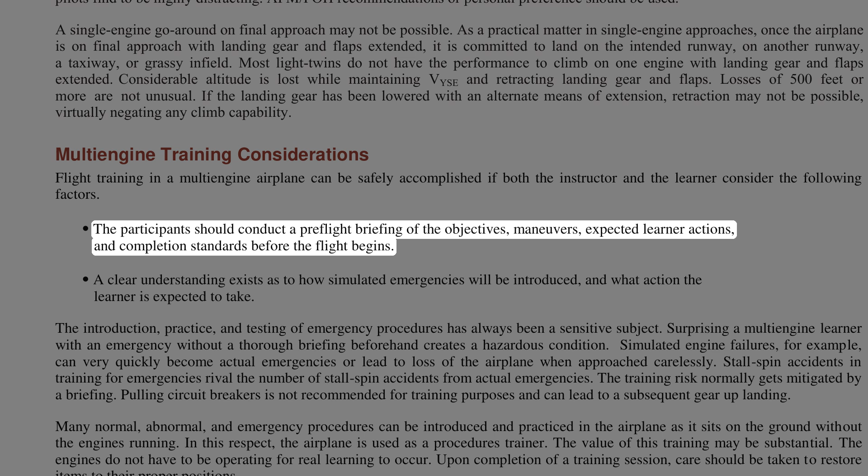Multi-engine training considerations. Flight training in a multi-engine airplane can be safely accomplished if both the instructor and the learner consider certain factors. The participants should conduct a pre-flight briefing of the objectives, maneuvers, expected learner actions, and completion standards before the flight begins. A clear understanding exists as to how simulated emergencies will be introduced and what action the learner is expected to take.

The introduction, practice, and testing of emergency procedures has always been a sensitive subject. Surprising a multi-engine learner with an emergency without a thorough briefing beforehand creates a hazardous condition. Simulated engine failures, for example, can very quickly become actual emergencies or lead to loss of the airplane when approached carelessly. Stall spin accidents in training for emergencies rival the number of stall spin accidents from actual emergencies. The training risk normally gets mitigated by a briefing.

Pulling circuit breakers is not recommended for training purposes and can lead to a subsequent gear-up landing.

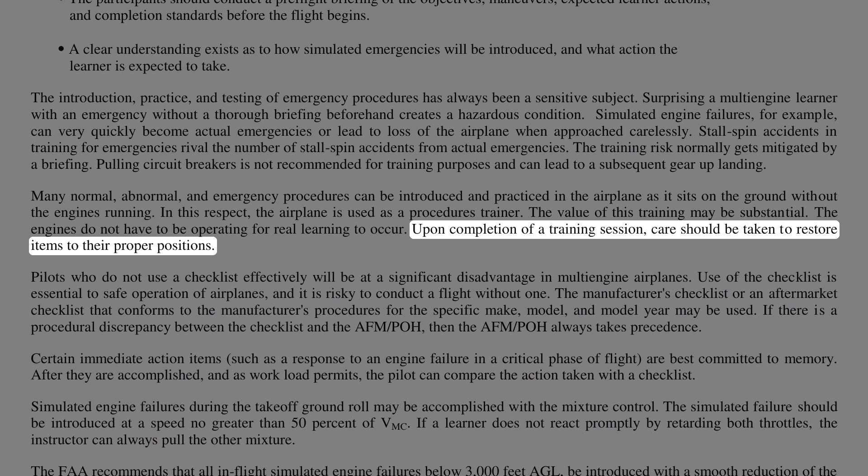Many normal, abnormal, and emergency procedures can be introduced and practiced in the airplane as it sits on the ground without the engines running. In this respect, the airplane is used as a procedures trainer. The value of this training may be substantial. The engines do not have to be operating for real learning to occur. Upon completion of a training session, care should be taken to restore items to their proper positions.

Pilots who do not use a checklist effectively will be at a significant disadvantage in multi-engine airplanes. Use of the checklist is essential to safe operation of airplanes, and it is risky to conduct a flight without one. The manufacturer's checklist or an aftermarket checklist that conforms to the manufacturer's procedures for the specific make, model, and model year may be used.

If there is a procedural discrepancy between the checklist and the AFM POH, then the AFM POH always takes precedence. Certain immediate action items, such as a response to an engine failure in a critical phase of flight, are best committed to memory. After they are accomplished, and as workload permits, the pilot can compare the action taken with a checklist.

Simulated engine failures during the takeoff ground roll may be accomplished with the mixture control. The simulated failure should be introduced at a speed no greater than 50% of VMC. If a learner does not react promptly by retarding both throttles, the instructor can always pull the other mixture.

The FAA recommends that all in-flight simulated engine failures below 3,000 feet AGL be introduced with a smooth reduction of the throttle. Thus, the engine is kept running and is available for instant use if necessary. Smooth throttle reduction avoids abusing the engine and possibly causing damage. Simulation of in-flight engine failures below VSSE introduces a very high and unnecessary training risk.

If the engines are equipped with dynamic crankshaft counterweights, it is essential to make throttle reductions for simulated failures smoothly. Other areas leading to dynamic counterweight damage include high RPM and low manifold pressure combinations, overboosting, and propeller feathering. Severe damage or repetitive abuse to counterweights will eventually lead to engine failure. Dynamic counterweights are found on larger, more complex engines. Instructors may check with maintenance personnel or the engine manufacturer to determine if their airplane engines are so equipped.

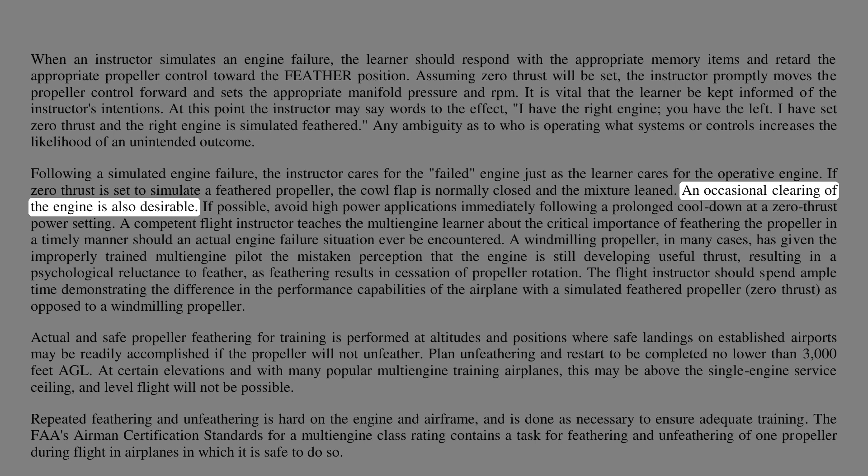Following a simulated engine failure, the instructor cares for the failed engine just as the learner cares for the operative engine. If zero thrust is set to simulate a feathered propeller, the cowl flap is normally closed and the mixture leaned. An occasional clearing of the engine is also desirable. If possible, avoid high power applications immediately following a prolonged cool down at a zero thrust power setting.

A competent flight instructor teaches the multi-engine learner about the critical importance of feathering the propeller in a timely manner should an actual engine failure situation ever be encountered. A windmilling propeller, in many cases, has given the improperly trained multi-engine pilot the mistaken perception that the engine is still developing useful thrust, resulting in a psychological reluctance to feather, as feathering results in cessation of propeller rotation.

The flight instructor should spend ample time demonstrating the difference in performance capabilities of the airplane with a simulated feathered propeller, zero thrust, as opposed to a windmilling propeller. Actual and safe propeller feathering for training is performed at altitudes and positions where safe landings on established airports may be readily accomplished if the propeller will not unfeather.

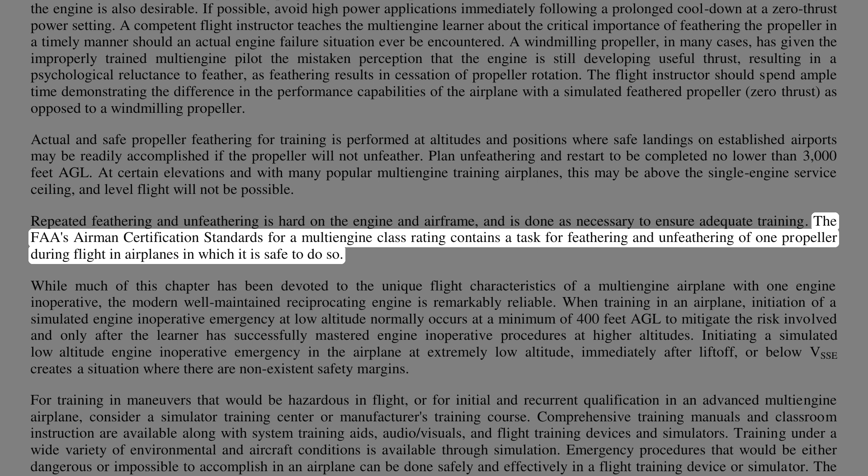Plan unfeathering and restart to be completed no lower than 3,000 feet AGL. At certain elevations, with many popular multi-engine training airplanes, this may be above the single-engine service ceiling, and level flight will not be possible. Repeated feathering and unfeathering is hard on the engine and airframe, and is done only as necessary to ensure adequate training. The FAA's Airman Certification Standards for a multi-engine class rating contains a task for feathering and unfeathering of one propeller during flight, in airplanes in which it is safe to do so.

While much of this chapter has been devoted to the unique flight characteristics of a multi-engine airplane with one engine inoperative, the modern well-maintained reciprocating engine is remarkably reliable. When training in an airplane, initiation of a simulated engine inoperative emergency at low altitude normally occurs at a minimum of 400 feet AGL to mitigate the risk involved, and only after the learner has successfully mastered engine inoperative procedures at higher altitudes. Initiating a simulated low-altitude engine inoperative emergency at extremely low altitude, immediately after liftoff, or below VSSE, creates a situation with non-existent safety margins.

For training in maneuvers that would be hazardous in flight, or for initial and recurrent qualification in an advanced multi-engine airplane, consider a simulator training center or manufacturer's training course. Comprehensive training manuals and classroom instruction are available, along with system training aids, audio, visuals, and flight training devices and simulators. Training under a wide variety of environmental and aircraft conditions is available through simulation. Emergency procedures that would be either dangerous or impossible to accomplish in an airplane can be done safely and effectively in a flight training device or simulator. The device need not necessarily duplicate the specific make and model of airplane to be useful; highly effective instruction can be obtained in training devices for other makes and models, as well as generic training devices.

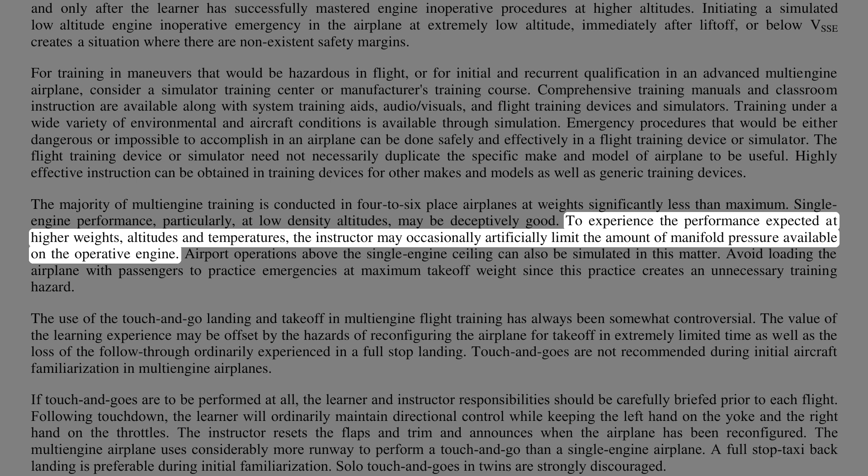The majority of multi-engine training is conducted in 4 to 6 place airplanes at weights significantly less than maximum. Single-engine performance, particularly at low-density altitudes, may be deceptively good. To experience the performance expected at higher weights, altitudes, and temperatures, the instructor may occasionally artificially limit the amount of manifold pressure available on the operative engine. Airport operations above the single-engine ceiling can also be simulated in this manner. Avoid loading the airplane with passengers to practice emergencies at maximum takeoff weight, since this practice creates an unnecessary training hazard.

The use of the touch-and-go landing and takeoff in multi-engine flight training has always been somewhat controversial. The value of the learning experience may be offset by the hazards of reconfiguring the airplane for takeoff in extremely limited time, as well as the loss of the follow-through ordinarily experienced in a full-stop landing. Touch-and-goes are not recommended during initial aircraft familiarization in multi-engine airplanes. If touch-and-goes are to be performed at all, the learner and instructor responsibilities should be carefully briefed prior to each flight.

Following touchdown, the learner will ordinarily maintain directional control while keeping the left hand on the yoke and the right hand on the throttles. The instructor resets the flaps and trim and announces when the airplane has been reconfigured. The multi-engine airplane uses considerably more runway to perform a touch-and-go than a single-engine airplane, so a full-stop taxi-back landing is preferable during initial familiarization. Solo touch-and-goes in twins are strongly discouraged.

Chapter Summary. Small multi-engine airplanes handle much like single-engine airplanes as long as both engines are functioning normally. A competent multi-engine pilot, however, acquires the additional knowledge, risk mitigation strategies, and practical skills required to fly a multi-engine airplane in case a loss of thrust from one engine actually occurs. In that case, the pilot will be able to take appropriate action, leading to a safe outcome.